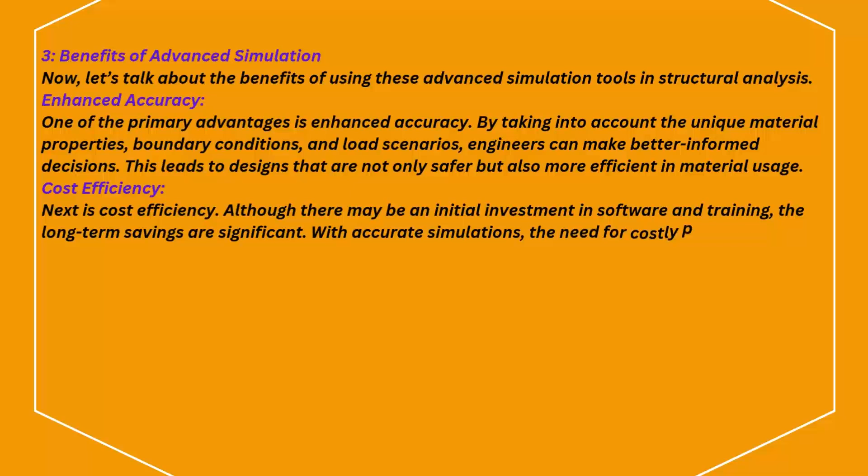Next is cost efficiency. Although there may be an initial investment in software and training, the long-term savings are significant. With accurate simulations, the need for costly physical prototypes and extensive testing is reduced. Engineers can optimize designs and identify potential issues early in the process, saving both time and money.

Improved safety. Safety is a critical concern in engineering. Advanced simulation tools enable engineers to conduct comprehensive risk assessments and safety evaluations. By simulating extreme conditions, such as earthquakes or heavy winds, engineers can better understand how structures will behave and implement necessary reinforcements or changes before construction begins.

Real-world applications. For instance, in the aerospace industry, companies use advanced simulation tools to analyze the structural integrity of aircraft components under various flight conditions. In civil engineering, simulations help design earthquake-resistant buildings in seismic zones, ensuring they can withstand potential disasters.

In conclusion, advanced simulation tools are a game-changer in structural analysis. They provide engineers with the ability to create safer, more efficient, and cost-effective designs. As technology continues to evolve, we can expect even more innovative solutions that push the boundaries of what's possible in engineering.

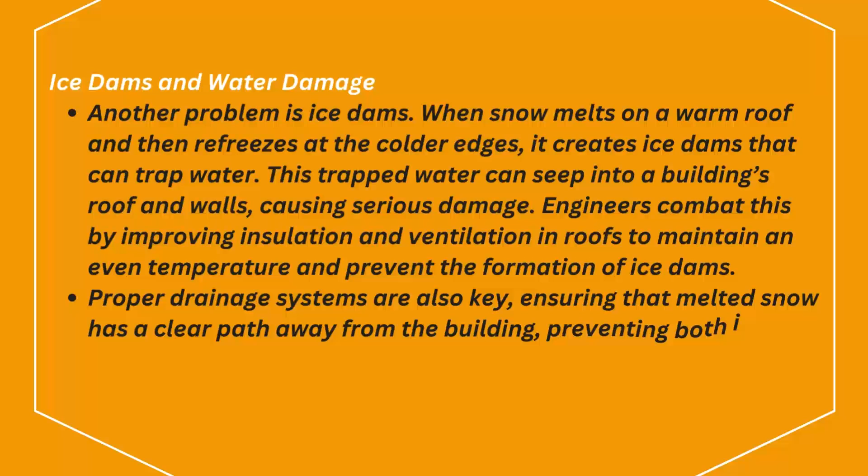Ice dams and water damage. Another problem is ice dams. When snow melts on a warm roof and then refreezes at the colder edges, it creates ice dams that can trap water. This trapped water can seep into a building's roof and walls, causing serious damage. Engineers combat this by improving insulation and ventilation in roofs to maintain an even temperature and prevent the formation of ice dams. Proper drainage systems are also key, ensuring that melted snow has a clear path away from the building, preventing both ice buildup and water infiltration.

Thermal expansion and contraction. Cold temperatures also lead to the issue of thermal expansion and contraction. Materials like steel and concrete expand in warm weather and contract in the cold. Over time, this constant movement can cause cracks and weaken structures. Engineers account for this by using flexible materials in critical areas, allowing buildings to expand and contract without causing damage.

Wind and snow drift.

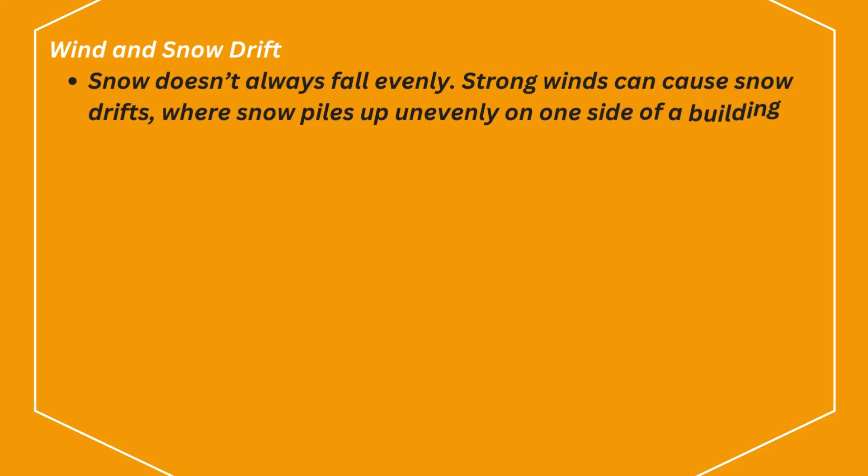Snow doesn't always fall evenly. Strong winds can cause snow drifts, where snow piles up unevenly on one side of a building. This creates unbalanced loads, which can strain the structure in unexpected ways. Engineers design buildings to handle these uneven forces by reinforcing the most vulnerable areas and incorporating wind barriers to control snow distribution. In regions where ice and snow are common, building design requires careful planning and engineering to prevent damage and ensure safety. From steep roofs to advanced drainage systems, engineers use a variety of techniques to keep buildings strong in the face of winter's challenges.

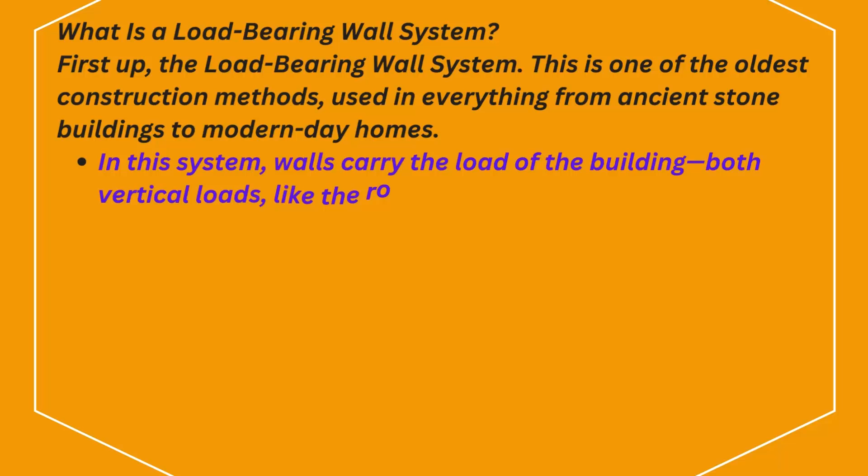What is a load-bearing wall system? First up, the load-bearing wall system. This is one of the oldest construction methods, used in everything from ancient stone buildings to modern-day homes. In this system, walls carry the load of the building, both vertical loads, like the roof, and lateral forces, like wind or earthquakes. These walls act as the primary support, and as a result, they can't be easily modified without affecting the building's stability. One important thing to remember: load-bearing walls usually limit the size of windows and openings because the walls need to remain strong to support the structure.

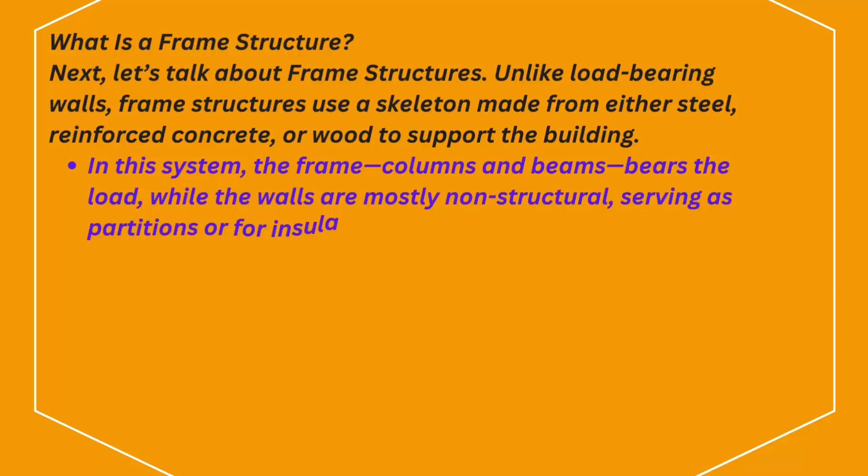What is a frame structure? Next, let's talk about frame structures. Unlike load-bearing walls, frame structures use a skeleton made from either steel, reinforced concrete, or wood to support the building. In this system, the frame, columns, and beams bear the load, while the walls are mostly non-structural, serving as partitions or for insulation. This allows for much larger windows, open spaces, and flexibility in design because the walls aren't carrying any weight. Frame structures are commonly used in high-rise buildings and modern constructions where open floor plans are important.

Let's go deeper into the load-bearing wall system. What are its strengths and weaknesses? On the plus side, load-bearing walls are often cost-effective for smaller buildings, especially homes, because they don't require as much steel or concrete. They also provide excellent thermal insulation, which can make a building more energy efficient. However, the downside is limited flexibility. Once the walls are in place, it's difficult to modify the layout without compromising the structure. And if you're looking to build taller than a few stories, this system becomes less practical due to the need for thicker, stronger walls.

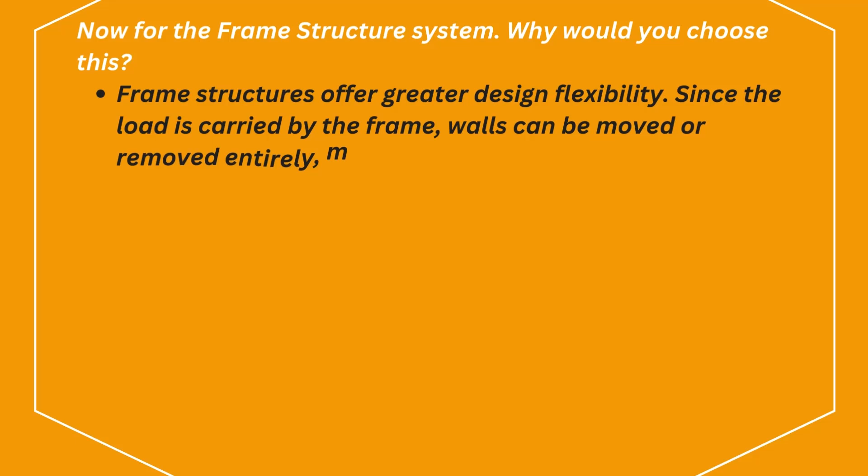Now for the frame structure system. Why would you choose this? Frame structures offer greater design flexibility. Since the load is carried by the frame, walls can be moved or removed entirely, making it perfect for open-plan spaces. This system also supports taller buildings and allows for larger windows, which is why it's popular in high-rise and commercial structures. But there are downsides too. Frame structures can be more expensive to build due to the materials required, like steel or reinforced concrete. They can also require more specialized labor and take longer to construct.

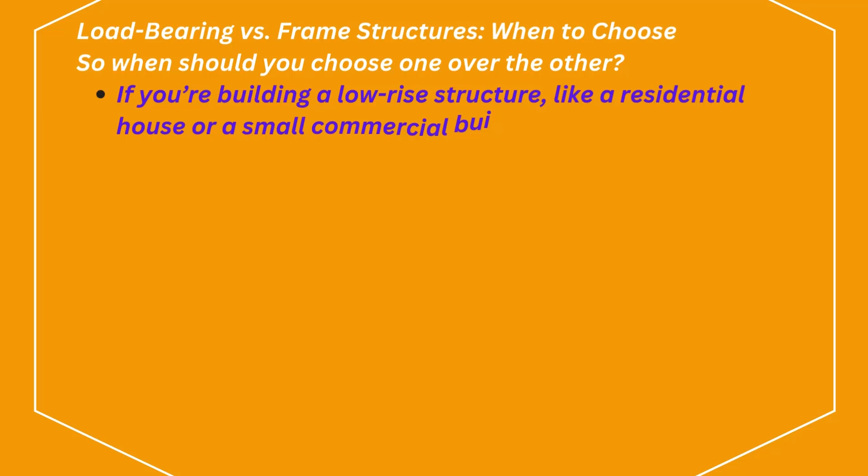Load-bearing versus frame structures. When to choose. So, when should you choose one over the other? If you're building a low-rise structure, like a residential house or a small commercial building, the load-bearing wall system could be a cost-effective and energy-efficient option. However, if you need design flexibility, large open spaces, or if you're going for a tall building, then frame structures are the way to go. In the end, it's all about your project's needs. Load-bearing wall systems offer simplicity and cost savings, while frame structures provide flexibility and support for larger, more complex designs.

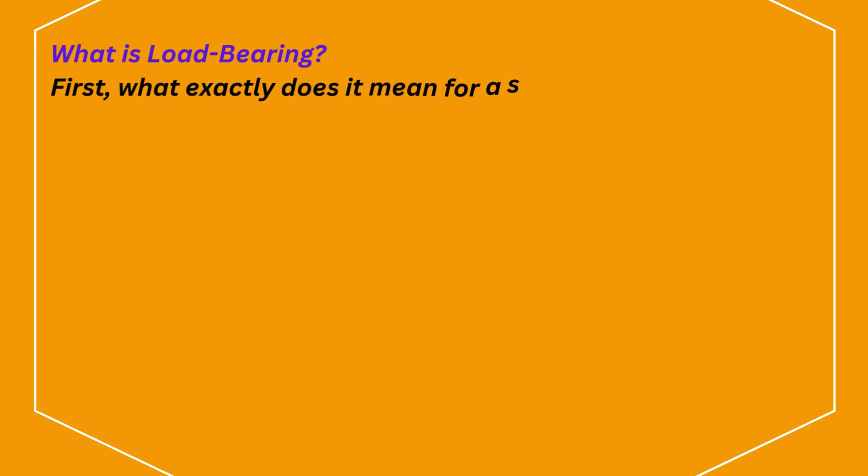What is load-bearing? First, what exactly does it mean for a structure to be load-bearing? At its most basic, it's any part of a building or a structure that supports weight, or in engineering terms, loads. This includes walls, columns, beams, and floors. These components don't just carry their own weight. They distribute external forces like gravity, wind, earthquakes, and even people walking on a floor. If a load-bearing element fails, the whole structure could be at risk.

This is why engineers spend significant time calculating how to manage these loads effectively. The key principles of load optimization: engineers optimize load-bearing structures through several fundamental principles.

First, material selection. Different materials have varying strengths. Steel, concrete, wood all have unique properties. Engineers choose materials that balance strength, cost, and durability. For example, steel is strong but expensive, while concrete is more cost-effective and excellent in compression.

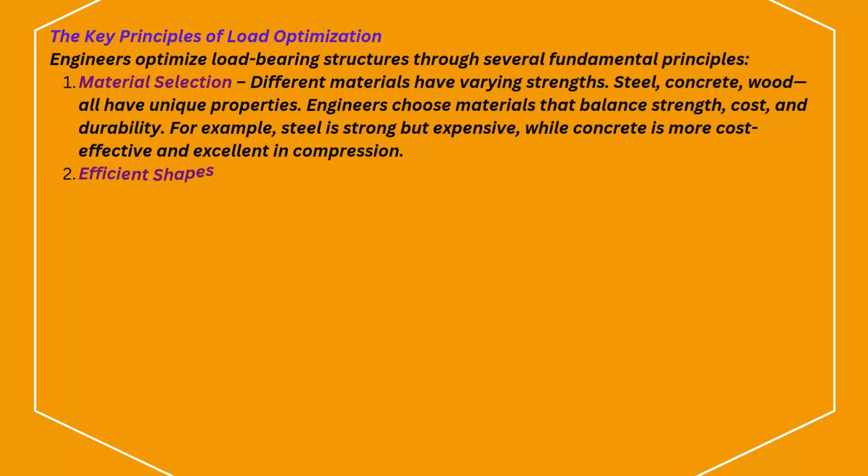Second, efficient shapes. Geometry plays a key role. Triangles and arches are often used because they distribute loads more efficiently than squares or rectangles. That's why you see triangular trusses in roofs and arched bridges. They're strong and require fewer materials.

Third, load distribution. Engineers design structures so that loads are evenly spread across multiple components. Instead of a single beam bearing all the weight, that load is shared across several beams or columns. Think of it as teamwork for materials. No single part bears the entire burden.

Fourth, redundancy. This means creating alternate load paths. If one part fails, another part can still handle the load. This prevents catastrophic collapses, making structures more resilient in emergencies.

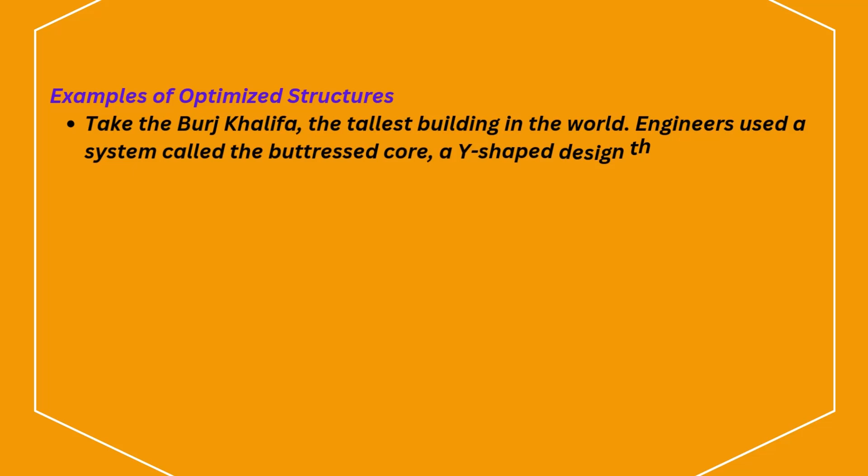Examples of optimized structures: take the Burj Khalifa, the tallest building in the world. Engineers used a system called the buttressed core, a Y-shaped design that evenly distributes the weight of the tower, reducing the load on any one point. This allows it to soar to 828 meters while still being stable.

Or consider suspension bridges like the Golden Gate Bridge. The cables distribute the bridge's load, allowing it to span incredible distances while staying light and flexible. These examples show that optimization isn't just about using strong materials, it's about using them intelligently.

In conclusion, optimizing load-bearing structures is a delicate dance between physics, materials, and design. Engineers must balance all these factors to ensure that buildings are both strong and cost-effective. The next time you walk into a skyscraper or drive over a bridge, remember, it's not just a structure, it's a carefully crafted solution designed to bear the loads of our world.

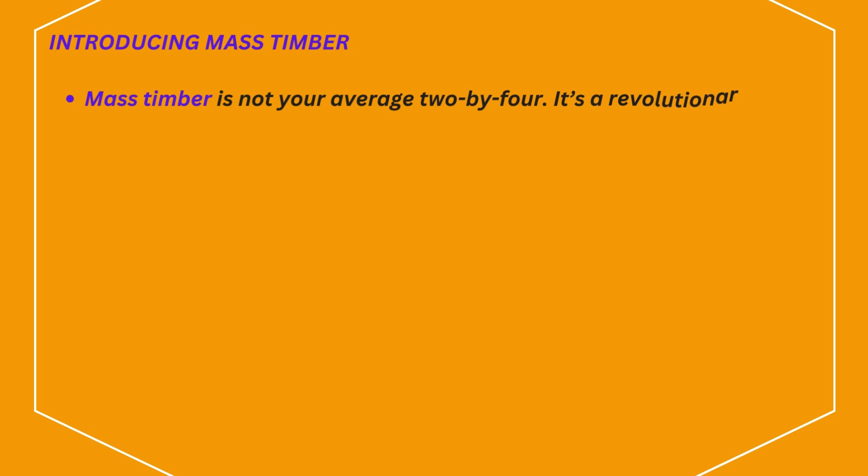The answer lies in a new type of wood material known as mass timber. Mass timber is not your average 2x4. It's a revolutionary engineered wood product that involves laminating layers of wood together to create a material that's incredibly strong, durable, and surprisingly fire-resistant. One of the most popular types is cross-laminated timber, or CLT for short. Think of it as wood on steroids. What makes mass timber special is its ability to match, and sometimes even exceed, the strength of concrete and steel. Because of its strength-to-weight ratio, it can support massive loads without crumbling under pressure.

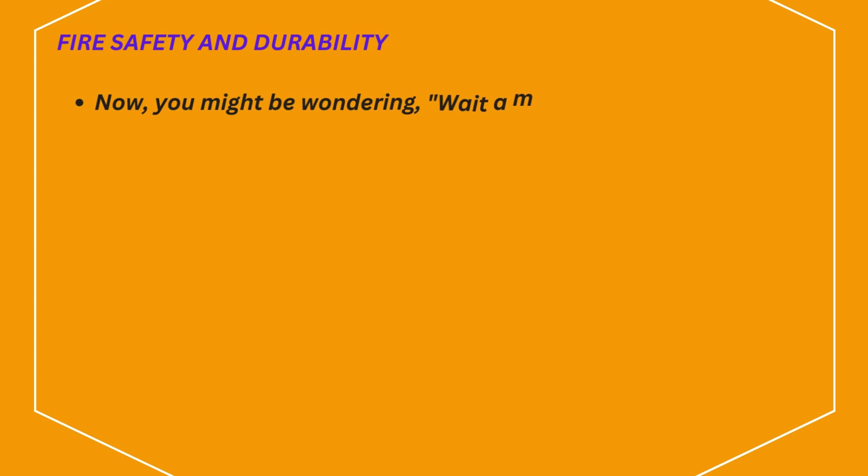Fire safety and durability: now, you might be wondering, how is wood safe in a skyscraper? Doesn't it burn easily? It's a fair question, but here's where the science gets interesting. Unlike smaller pieces of wood that catch fire quickly, mass timber chars on the outside when exposed to flames, creating a protective layer that slows down the spread of fire. In many cases, mass timber buildings have proven to be just as safe, if not safer, than traditional concrete or steel structures in fire tests. And as for durability, these wooden towers are designed to last just as long as any other modern building, with minimal maintenance required.

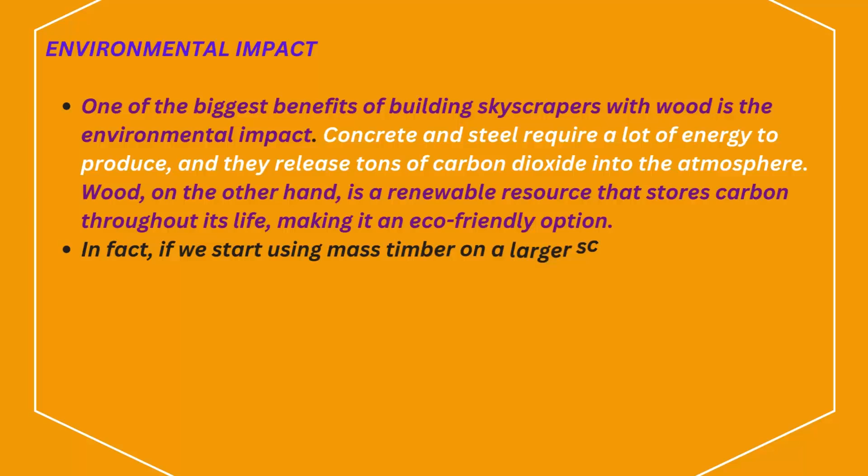Environmental impact: one of the biggest benefits of building skyscrapers with wood is the environmental impact. Concrete and steel require a lot of energy to produce, and they release tons of carbon dioxide into the atmosphere. Wood, on the other hand, is a renewable resource that stores carbon throughout its life, making it an eco-friendly option. In fact, if we start using mass timber on a larger scale, it could drastically reduce the carbon footprint of the construction industry. We're talking about a greener future, where towering cities are built from sustainable materials.

Examples of timber towers. Still skeptical? Well, let's look at some real-life examples.

In Norway, there's the Mjøstårnet, the world's tallest timber building, standing at 18 stories. And it's not alone. Projects like the HoHo Tower in Vienna and Brock Commons in Vancouver are proving that wooden skyscrapers are not only possible, but are already reshaping city skylines around the world. Architects and engineers are pushing the boundaries, and some are even designing timber buildings that could reach 30 stories or higher. The potential for wooden skyscrapers is only just beginning.

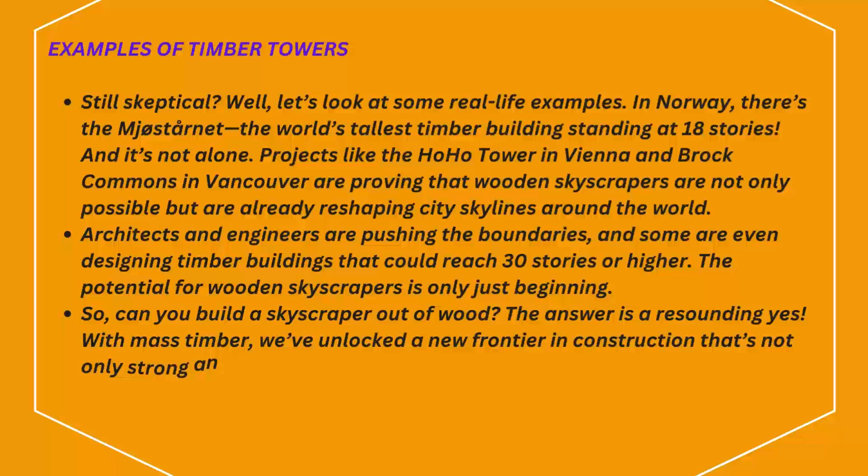So, can you build a skyscraper out of wood? The answer is a resounding yes. With mass timber, we've unlocked a new frontier in construction that's not only strong and safe, but also sustainable. As urban populations grow and environmental concerns rise, timber towers could be a key part of the future.

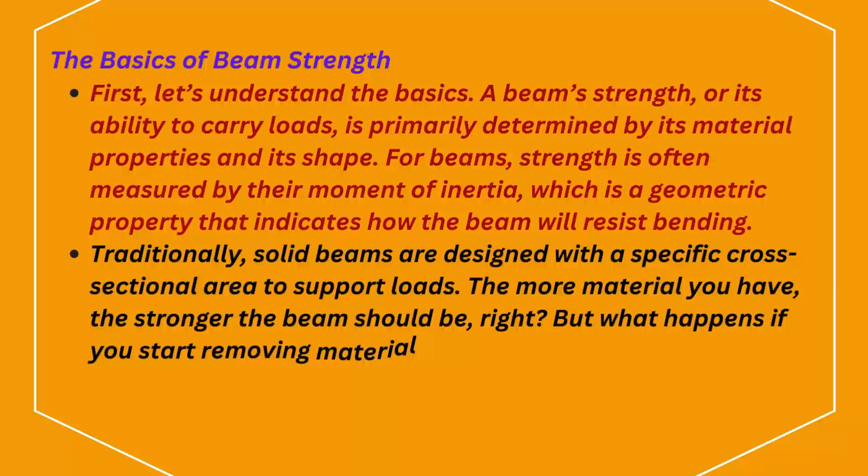The basics of beam strength. First, let's understand the basics. A beam's strength, or its ability to carry loads, is primarily determined by its material properties and its shape. For beams, strength is often measured by their moment of inertia, which is a geometric property that indicates how the beam will resist bending. Traditionally, solid beams are designed with a specific cross-sectional area to support loads. The more material you have, the stronger the beam should be, right? But what happens if you start removing material and make the beam hollow?

The science behind hollow beams. Here's where things get interesting. Hollow beams are often used in engineering and construction for a couple of reasons. First, moment of inertia: this helps determine the beam's resistance to bending, and it can actually be increased by making the beam hollow, provided you maintain the right shape. This is because distributing the material further from the center of the beam increases its resistance to bending. A hollow beam with a well-designed cross-section can have a higher moment of inertia compared to a solid beam of the same weight.

Second, material efficiency. By hollowing out a beam, you reduce the amount of material used while maintaining its strength. This not only reduces the weight of the beam, but also the overall cost of materials. The key is to optimize the hollow space and ensure that the beam's shape supports the load effectively.

Third, strength-to-weight ratio. Hollow beams can achieve a better strength-to-weight ratio than solid beams. For instance, I-beams and tubular beams are hollow, but are extremely effective in resisting bending and shear forces. They're designed to be strong and lightweight, making them ideal for applications where reducing weight is crucial.

Real-world applications and limitations. Hollow beams are widely used in various applications, such as in bridges, high-rise buildings, and even in aerospace structures. They allow for longer spans and reduce the load on supporting structures. For example, steel and concrete hollow core slabs are common in floor systems because they offer good strength with reduced weight. However, there are limitations. Designing hollow beams requires precise engineering to ensure they can handle the intended loads and stresses. If not designed correctly, hollow beams can be prone to issues like buckling or stress concentrations.

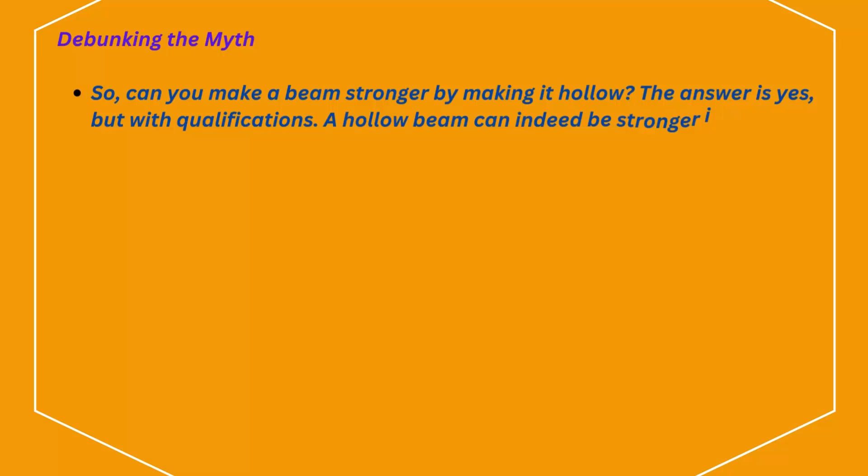Debunking the myth. So, can you make a beam stronger by making it hollow? The answer is yes, but with qualifications. A hollow beam... Hey everyone, welcome back to Blueprint to Reality.

Today, we're tackling an important topic in civil engineering: reinforced concrete versus pre-stressed concrete. Both are widely used in construction, but what sets them apart? Let's break down the key differences and help you decide which one suits your project better.

Let's start with reinforced concrete. Reinforced concrete is made by embedding steel reinforcement bars, or rebar, into concrete to increase its tensile strength. Concrete is naturally strong in compression but weak in tension, and rebar helps compensate for that by resisting the tensile forces that concrete can't handle on its own. This type of concrete is commonly used in residential buildings, bridges, and roads because it's relatively simple and cost-effective to produce. The rebar is positioned before the concrete is poured, and once it cures, the steel works together with the concrete to resist loads. However, cracking can occur if the tensile stress exceeds the concrete's capacity.

Now, let's move on to pre-stressed concrete. Pre-stressed concrete takes the concept of reinforcement a step further.

Before or during construction, steel tendons or cables are pre-tensioned or post-tensioned to put the concrete under compression. Since concrete performs best under compression, this process allows pre-stressed concrete to resist both compression and tension much more effectively than reinforced concrete.

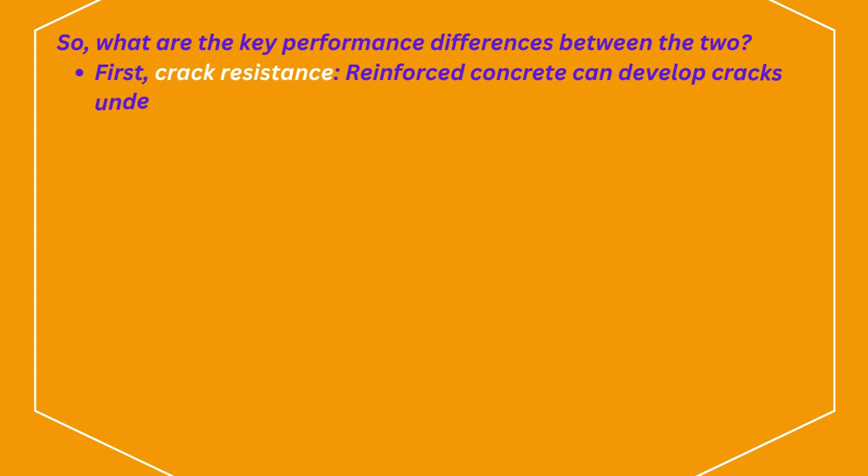So, what are the key performance differences between the two? First, crack resistance. Reinforced concrete can develop cracks under tensile loads, which can lead to structural issues over time if not properly maintained. Pre-stressed concrete, on the other hand, is designed to minimize or even eliminate cracks because of the pre-applied compression forces.

Second, load-bearing capacity. Pre-stressed concrete is much stronger and can handle heavier loads and longer spans without sagging or cracking, whereas reinforced concrete is better suited for shorter spans and moderate loads.

Finally, deflection. Pre-stressed concrete deflects less under load due to the tension steel, making it ideal for projects where minimizing deflection is critical. Now, let's talk about cost and complexity.

Reinforced concrete is simpler and cheaper to produce, making it a go-to option for smaller projects or structures where high loads and long spans aren't as important. It's easy to work with, and the construction process is straightforward.

Pre-stressed concrete, on the other hand, is more complex and requires specialized equipment and labor for tensioning the steel cables. This increases both the cost and construction time. However, the benefits of increased strength and reduced cracking make pre-stressed concrete worth the investment for larger, more demanding projects.

So there you have it. Reinforced concrete is great for simpler, smaller structures, while pre-stressed concrete excels in high-load, long-span, and crack-sensitive projects.

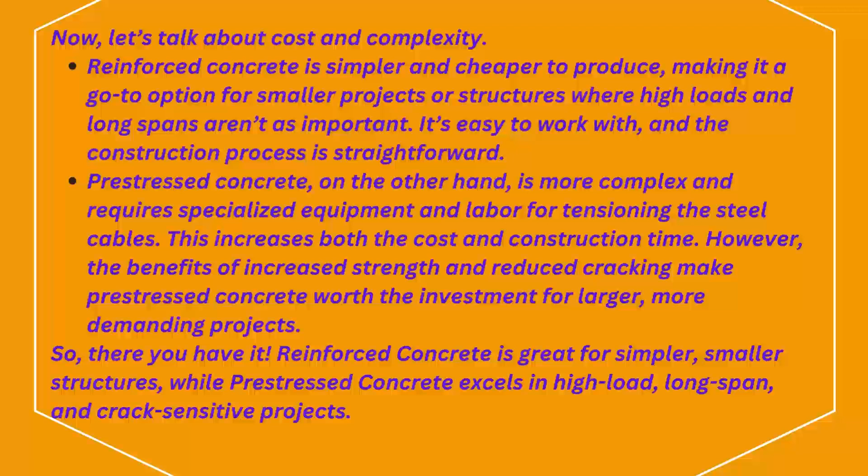In the world of engineering, bridges have always symbolized the connection between two points, overcoming physical barriers with elegance and precision. But today, engineers are pushing the boundaries even further. Modern bridge designs are redefining what's possible, blending sustainability, innovation, and structural efficiency.

1. A shift toward sustainability. Bridges are no longer just about connecting roads, they're also about connecting people to a sustainable future. Engineers are designing with eco-friendly materials and practices to reduce carbon footprints.

For example, we're seeing the rise of bridges constructed from recycled materials like plastic waste, which reduce the environmental impact. The use of modular construction, where sections are built off-site and assembled on-site, not only speeds up the process but also minimizes waste and emissions during construction.

2. Innovation in structural design. Engineers are also experimenting with new shapes and forms. Traditional bridge designs like suspension and arch bridges are still relevant, but now we're seeing incredible geometric innovations.

Think of bridges with lightweight, yet incredibly strong, materials such as carbon fiber composites. These materials allow for thinner, sleeker designs without compromising safety or durability. Some futuristic designs include self-healing concrete, a material that can repair cracks on its own, extending the lifespan of bridges

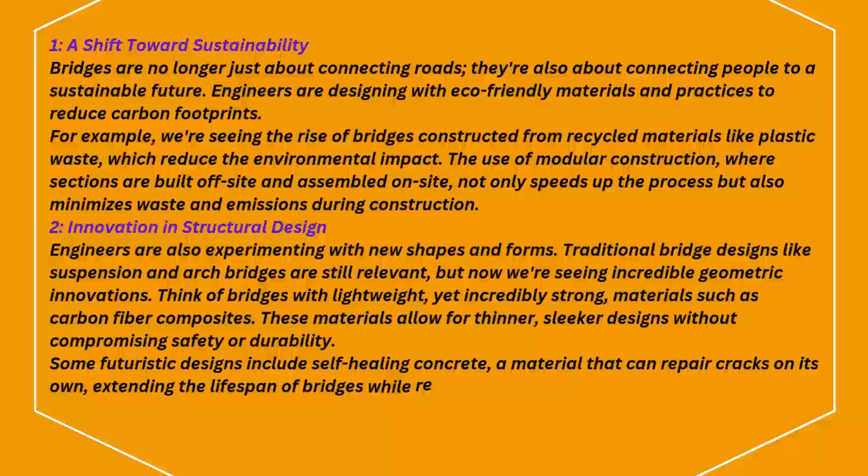while reducing the need for frequent maintenance. This not only saves money, but also increases the safety of the infrastructure.

3. Smart bridges, the future of connectivity. Perhaps the most groundbreaking development is the rise of smart bridges. Imagine a bridge that can monitor its own health in real time. Sensors embedded in the structure can detect stress, strain, temperature, and even potential weaknesses before they become critical.

This data is transmitted to engineers who can analyze it and make real-time decisions on maintenance. Smart technology also helps in predicting how a bridge will behave under certain conditions, like heavy traffic or extreme weather. These insights make it possible to ensure the safety and longevity of bridges, all while minimizing disruptions to daily life.

4. Aesthetic and functional synergy. It's not just about functionality. Modern bridge designs are fusing aesthetics with practicality. Many bridges today are works of art, designed to be both functional and beautiful.

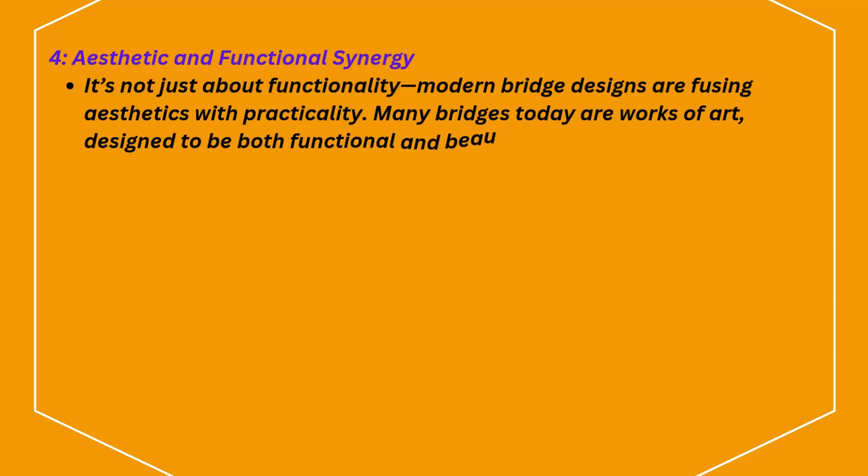Think of the Millau Viaduct in France or the Zhangjiajie Glass Bridge in China. These bridges attract tourists and blend harmoniously with their surroundings, showcasing that a bridge can be more than just infrastructure. It can be a landmark.

As the world demands more resilient, eco-friendly, and smarter infrastructure, engineers are responding with creative solutions that challenge traditional boundaries. From sustainable materials to smart technology, the bridges of tomorrow are being built today. They don't just connect us physically, they represent the future of engineering innovation.

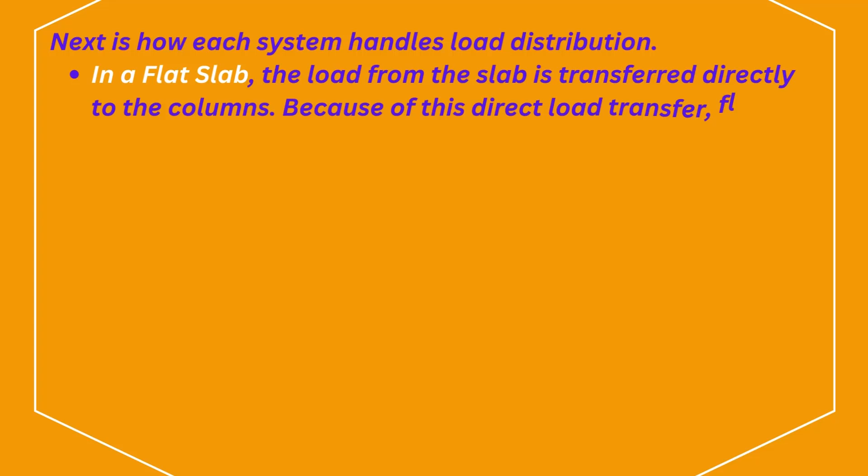Next is how each system handles load distribution. In a flat slab, the load from the slab is transferred directly to the columns. Because of this direct load transfer, flat slabs need to be thicker or require the addition of column capitals to prevent punching shear failures, especially in areas with high loads. This can lead to increased material usage.

In a two-way slab system, the load is transferred across beams in both directions, which distributes the load more evenly. This leads to a more efficient design for handling heavier loads, especially in multi-story buildings or structures with a grid-like layout. Now, let's talk about design flexibility and space utilization.

One of the main advantages of the flat slab is the freedom it offers for open spaces. Without beams, you have more design flexibility for architectural layouts, especially for offices, malls, or parking garages. You can create large, open rooms without the visual or spatial interruption of beams. In contrast, two-way slabs require beams, which can limit interior space design. Beams create drops in ceiling height and may affect the positioning of utilities, lighting, and partitions.

However, the added strength of this system can allow for thinner slabs and a potentially lighter structure overall, which is beneficial in smaller-scale projects or residential buildings.

The cost and construction time are always important considerations. Flat slabs are generally quicker to construct because of their simpler formwork. The absence of beams means fewer steps during construction, which can reduce labor costs and save time. But remember, the thicker slabs and additional reinforcement may increase the cost of materials.

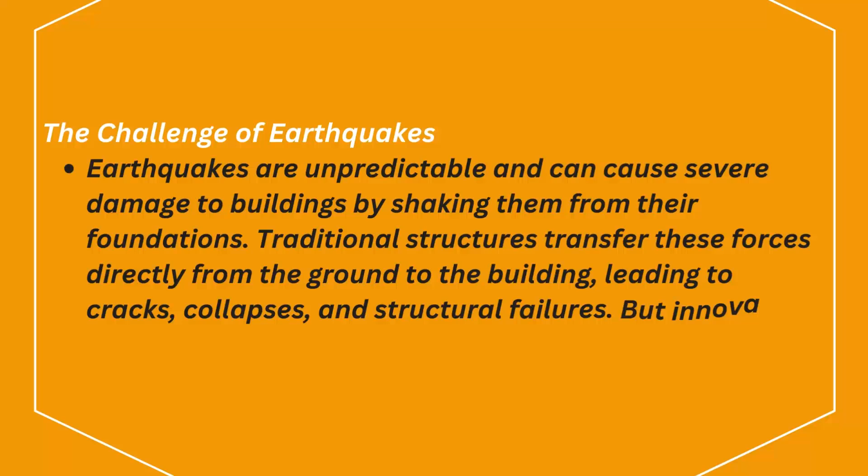Earthquakes are unpredictable and can cause severe damage to buildings by shaking them from their foundations. Traditional structures transfer these forces directly from the ground to the building, leading to cracks, collapses, and structural failures. But innovations like base isolators and tuned mass dampers are revolutionizing how we build to withstand seismic events.

Base isolators. Let's start with base isolators. These devices are installed between a building's foundation and its structure, acting as a buffer during an earthquake. Instead of letting the building move with the ground, base isolators allow the foundation to shift independently from the rest of the structure. This reduces the amount of force transferred to the building, dramatically lowering the risk of damage.

Base isolators typically consist of layers of rubber and steel with a flexible core. When seismic waves hit, the isolators absorb and spread out the energy, allowing the building above to sway gently without absorbing the full impact.

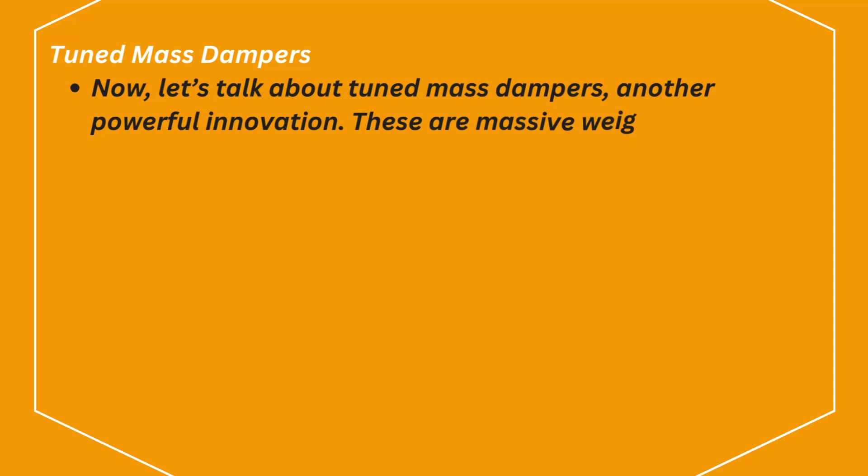Tuned mass dampers. Now let's talk about tuned mass dampers, another powerful innovation. These are massive weights, usually installed at the top of a building, that move in opposition to seismic vibrations. When an earthquake shakes the building, the damper swings in the opposite direction, effectively canceling out much of the motion.

Tuned mass dampers are carefully calibrated, or tuned, to match the building's natural frequency. This tuning allows them to absorb and dissipate the energy from seismic vibrations, preventing the building from swaying too much and reducing structural stress. How they work together: base isolators and tuned mass dampers create a powerful defense against earthquakes.

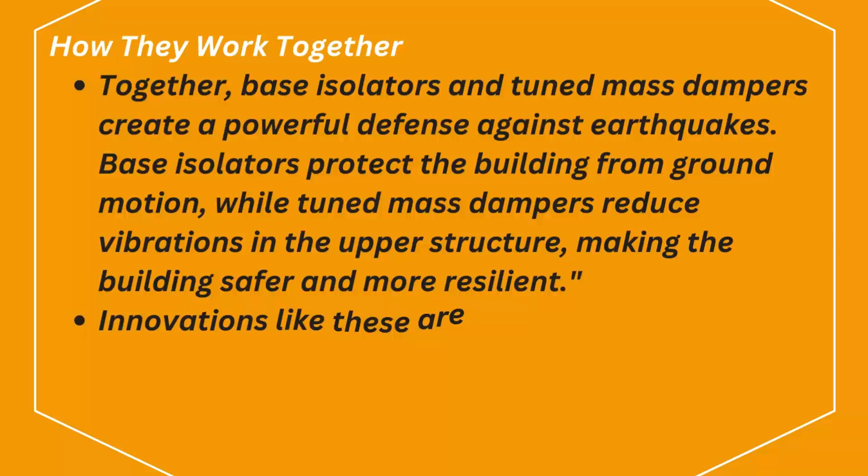Base isolators protect the building from ground motion, while tuned mass dampers reduce vibrations in the upper structure, making the building safer and more resilient. Innovations like these are changing the way we design buildings in earthquake-prone areas, saving lives and protecting property.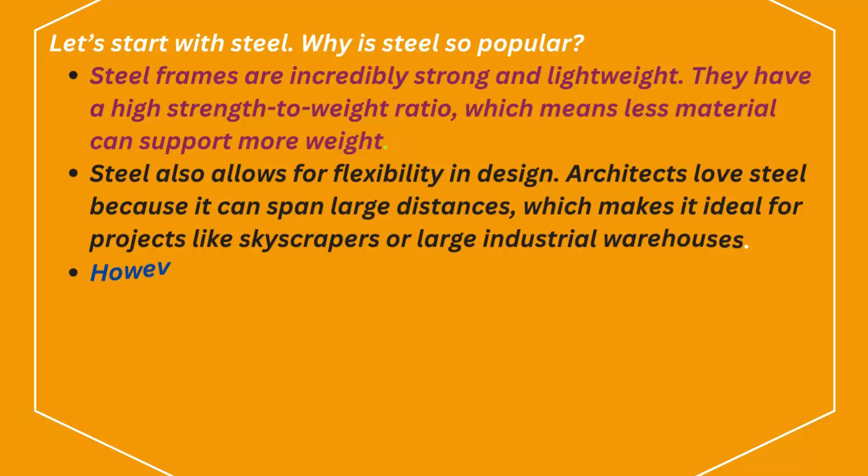Let's start with steel. Why is steel so popular? Steel frames are incredibly strong and lightweight. They have a high strength-to-weight ratio, which means less material can support more weight. Steel also allows for flexibility in design. Architects love steel because it can span large distances, which makes it ideal for projects like skyscrapers or large industrial warehouses. However, steel has some drawbacks.

It's susceptible to corrosion, especially in harsh weather conditions. This means maintenance costs can add up over time. Steel loses strength in high temperatures, so in case of fire, special fireproofing treatments are needed.

Now, let's talk about concrete frames. Why choose concrete? Concrete is extremely durable and handles compression well, making it a solid choice for low to mid-rise buildings. Concrete has excellent fire resistance, and it's great for projects where fire safety is a priority. However, concrete frames are much heavier than steel.

That means the foundation has to support more weight, which can increase construction time and cost. Another issue with concrete is its low tensile strength, which is why it needs reinforcement with steel rebar to prevent cracking. Finally, let's talk about cost and construction speed.

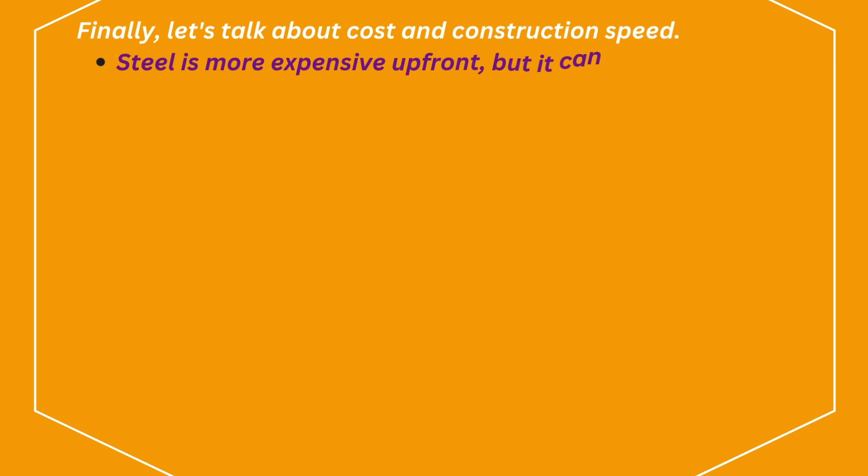Steel is more expensive upfront, but it can reduce labor costs due to faster assembly. Concrete, while generally cheaper in raw material, takes longer to build due to curing times. However, labor costs are often higher than steel. So if you're looking for a quick build, steel is often the better choice. But if you're focusing on long-term durability and fire resistance, concrete might be your go-to.

So, which is better? It depends on your project's needs. Steel offers speed and flexibility, while concrete gives you durability and fire safety.

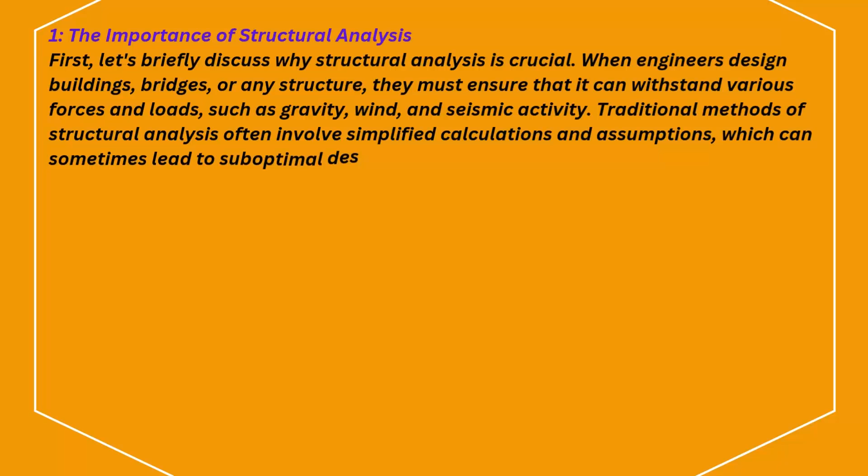The importance of structural analysis. First, let's briefly discuss why structural analysis is crucial. When engineers design buildings, bridges, or any structure, they must ensure that it can withstand various forces and loads, such as gravity, wind, and seismic activity. Traditional methods of structural analysis often involve simplified calculations and assumptions, which can sometimes lead to suboptimal designs or, worse, structural failures. This is where advanced simulation tools come into play.

What are advanced simulation tools? These tools include software programs that use finite element analysis, computational fluid dynamics, and other numerical methods to create detailed models of structures. By simulating real-world conditions, these tools allow engineers to visualize how a structure will respond to different forces throughout its life cycle. For example, finite element analysis software breaks down a structure into smaller, manageable elements, calculating how each one behaves under various conditions. This level of detail provides insights that traditional methods simply cannot offer.

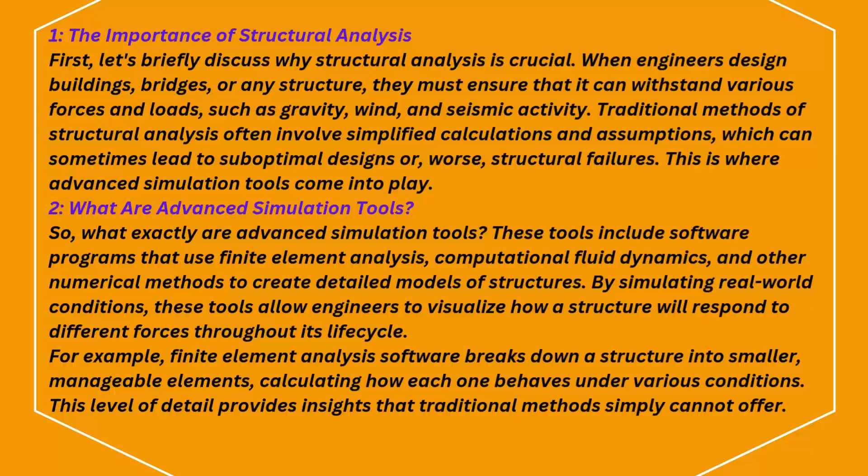Benefits of advanced simulation. Now, let's talk about the benefits of using these advanced simulation tools in structural analysis. Enhanced accuracy: one of the primary advantages is enhanced accuracy. By taking into account the unique material properties, boundary conditions, and load scenarios, engineers can make better informed decisions. This leads to designs that are not only safer, but also more efficient in material usage.

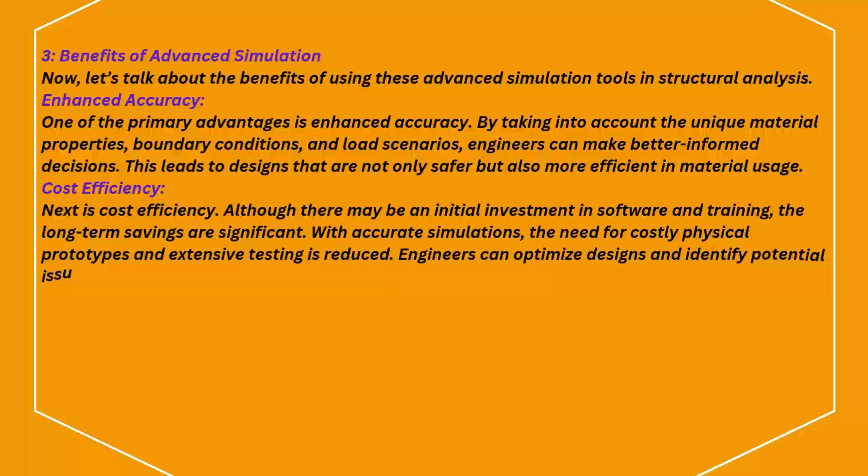Cost efficiency: next is cost efficiency. Although there may be an initial investment in software and training, the long-term savings are significant. With accurate simulations, the need for costly physical prototypes and extensive testing is reduced. Engineers can optimize designs and identify potential issues early in the process, saving both time and money.

Improved safety. Safety is a critical concern in engineering. Advanced simulation tools enable engineers to conduct comprehensive risk assessments and safety evaluations. By simulating extreme conditions, such as earthquakes or heavy winds, engineers can better understand how structures will behave and implement necessary reinforcements or changes before construction begins.

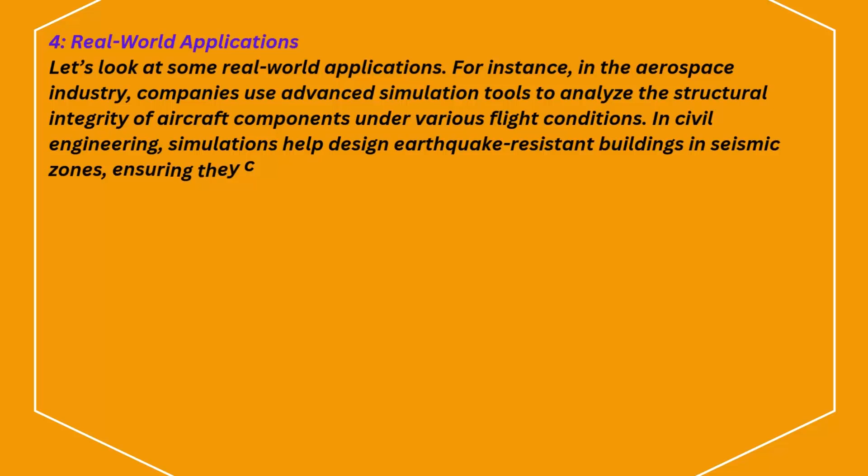Real-world applications. Let's look at some examples. In the aerospace industry, companies use advanced simulation tools to analyze the structural integrity of aircraft components under various flight conditions. In civil engineering, simulations help design earthquake-resistant buildings in seismic zones, ensuring they can withstand potential disasters.

In conclusion, advanced simulation tools are a game-changer in structural analysis. They provide engineers with the ability to create safer, more efficient, and cost-effective designs. As technology continues to evolve, we can expect even more innovative solutions that push the boundaries of what's possible in engineering. Thank you for joining us today.

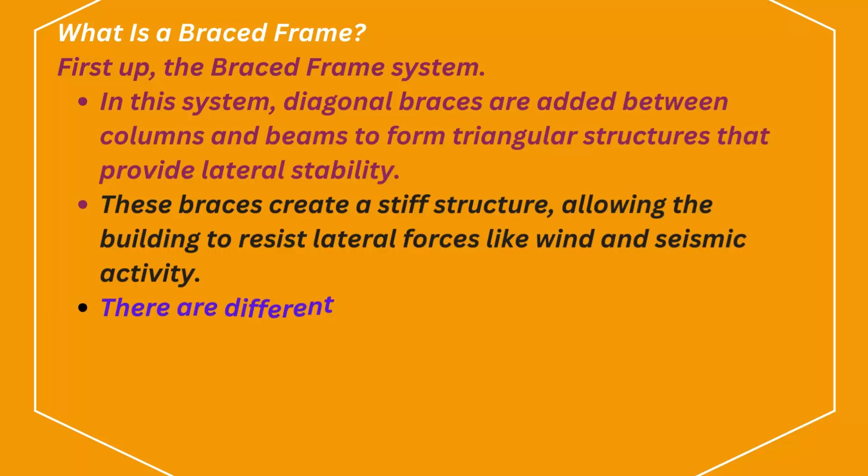What is a braced frame? First up, the braced frame system. In this system, diagonal braces are added between columns and beams to form triangular structures that provide lateral stability. These braces create a stiff structure, allowing the building to resist lateral forces like wind and seismic activity. There are different types of braced frames, such as X-bracing and K-bracing, each designed for different needs, but they all work by converting lateral forces into tension and compression within the braces.

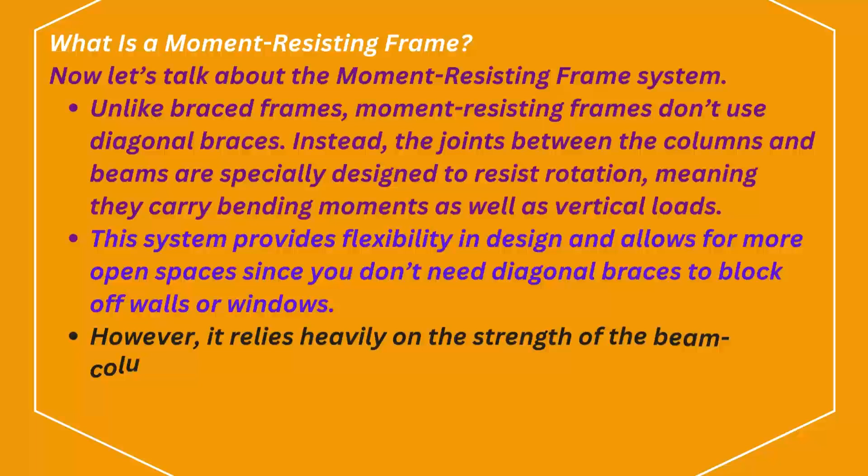What is a moment-resisting frame? Unlike braced frames, moment-resisting frames don't use diagonal braces. Instead, the joints between the columns and beams are specially designed to resist rotation, meaning they carry bending moments as well as vertical loads. This system provides flexibility in design and allows for more open spaces, since you don't need diagonal braces to block off walls or windows. However, it relies heavily on the strength of the beam-column connections to resist lateral forces.

So, what makes braced frames a good choice? The biggest advantage is their high stiffness. Braced frames are excellent at resisting lateral forces, making them a common choice in areas prone to earthquakes and high winds. They're also typically more cost-effective because braces are easier and faster to install than reinforced beam-column joints. However, one downside is that braced frames can restrict architectural design, as the diagonal braces often limit where windows, doors, or open spaces can be placed.

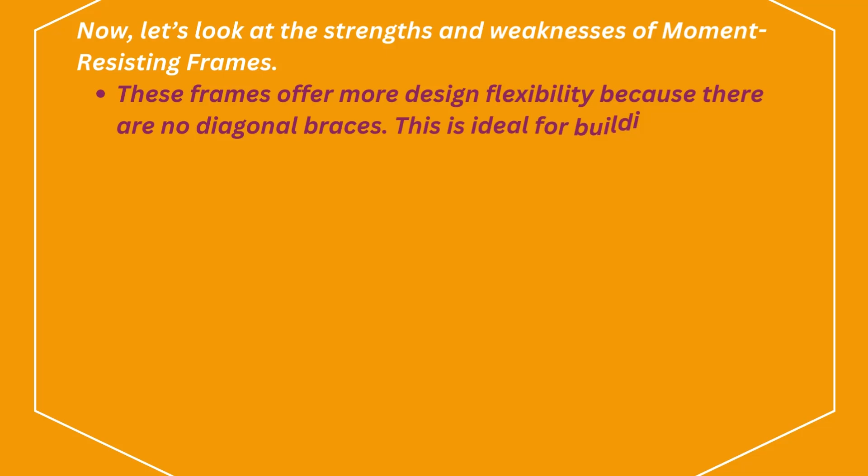Now, let's look at the strengths and weaknesses of moment-resisting frames. These frames offer more design flexibility because there are no diagonal braces, which is ideal for buildings that require large, open spaces or where aesthetics are a priority. They also allow for more natural light because you can have larger windows or open facades. However, the construction of these systems is more complex and expensive, since the joints between beams and columns need to be carefully designed and reinforced to handle both vertical and lateral loads.

Braced versus moment-resisting frames: when to choose. So how do you decide which system to use? If you're working on a building where lateral stability is the top concern, like in earthquake-prone regions, a braced frame is often the better choice due to its stiffness and cost-effectiveness. But if your project requires flexible design and large open spaces, like in modern office buildings or high-rises, a moment-resisting frame may be worth the extra investment.

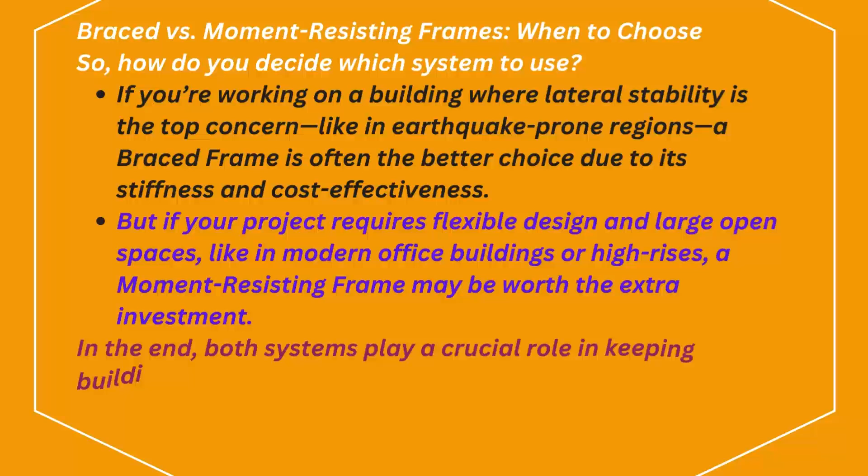In the end, both systems play a crucial role in keeping buildings safe and stable. Your choice depends on the balance between design flexibility and lateral strength.

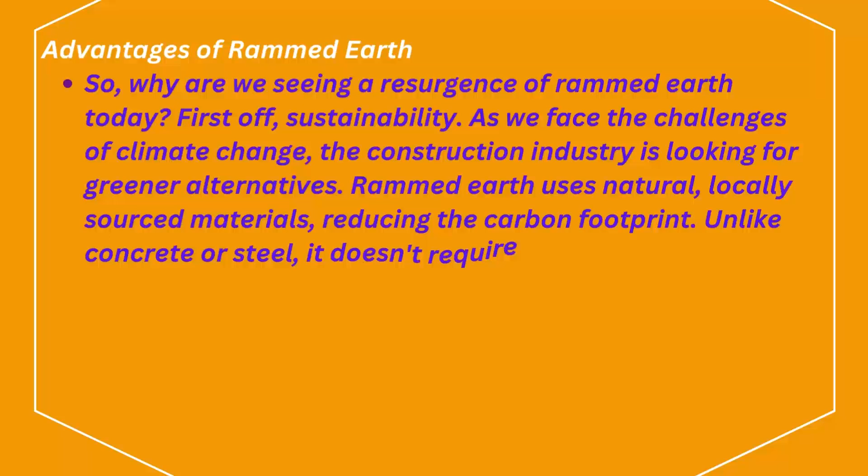Advantages of rammed earth. So why are we seeing a resurgence of rammed earth today? First, sustainability. As we face the challenges of climate change, the construction industry is looking for greener alternatives. Rammed earth uses natural, locally sourced materials, reducing the carbon footprint. Unlike concrete or steel, it doesn't require high-energy production processes. Secondly, its thermal properties are a major benefit.

Rammed earth walls provide excellent insulation, helping to regulate indoor temperatures naturally. This means reduced energy consumption for heating and cooling.

Modern applications and innovations. In recent years, architects and engineers have started to reimagine how rammed earth can fit into modern design. From luxury homes to eco-friendly resorts, rammed earth structures are finding their place in contemporary architecture. Advanced construction techniques and new materials, like stabilizers, are improving the strength and durability of these buildings while maintaining their natural aesthetic. Designers are also experimenting with various pigments and textures, creating visually striking structures that blend seamlessly with their surroundings.

Rammed earth is a perfect blend of ancient wisdom and modern innovation, offering a sustainable, durable, and beautiful building solution. As we move forward in the age of eco-conscious design, this technique may play a key role in reshaping how we think about construction.

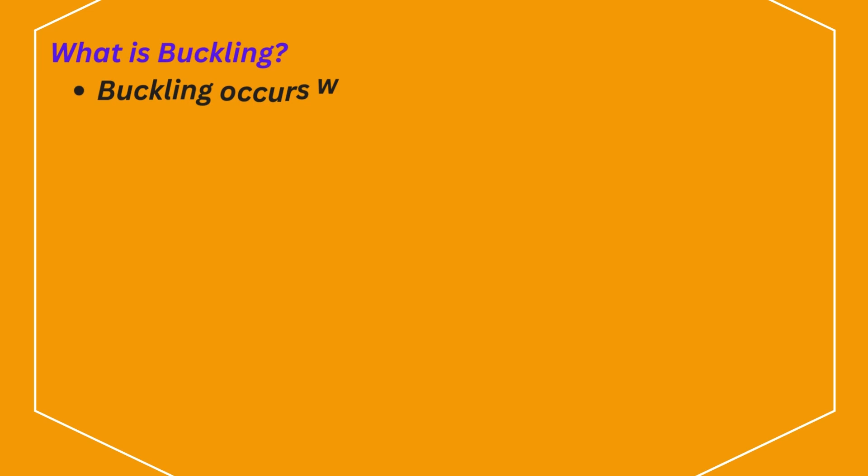Welcome to this brief but important explanation of a critical phenomenon in structural engineering: buckling. You've probably heard of structures collapsing unexpectedly, and in many cases, buckling is the hidden culprit. So, what exactly is buckling? Why does it happen, and how do engineers prevent it? Over the next few minutes, we'll explore these questions to uncover the dangers of buckling and its role in structural failures.

What is buckling? Buckling occurs when a structural element, like a column or beam, suddenly bends or twists under compressive stress. Imagine holding a long, thin ruler upright and pressing down gently from the top. At first, it resists the force, but at some point, it bends to the side. This is buckling. In real structures, this can be extremely dangerous. Columns in buildings or bridges are especially vulnerable to buckling when they are subjected to too much weight or force.

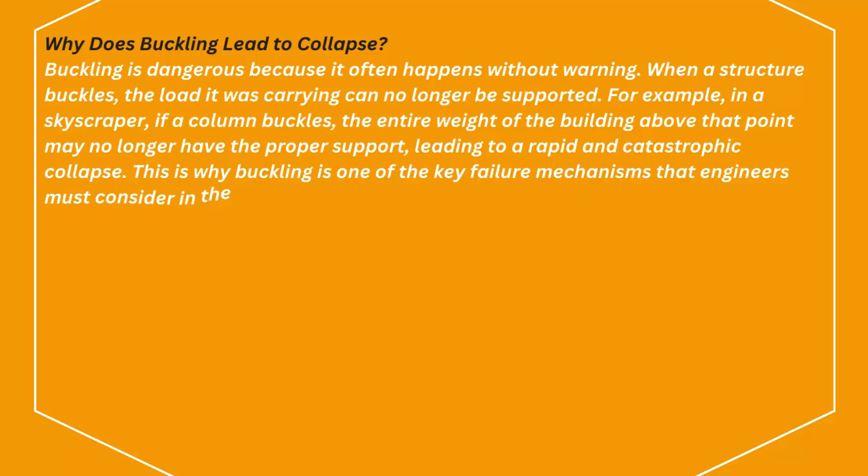Why does buckling lead to collapse? Buckling is dangerous because it often happens without warning. When a structure buckles, the load it was carrying can no longer be supported. For example, in a skyscraper, if a column buckles, the entire weight of the building above that point may no longer have the proper support, leading to a rapid and catastrophic collapse. This is why buckling is one of the key failure mechanisms that engineers must consider in their designs, especially for tall buildings and slender structures.

Critical load, the tipping point. So, what determines whether or not a structure will buckle? Engineers calculate something called the critical load, which is the maximum load a column or beam can handle before buckling. This depends on several factors, like the material, the length and shape of the element, and how it's supported at both ends. Once the load goes beyond this critical point, even a tiny increase in force can cause sudden failure. That's why understanding critical load is essential for designing structures that can withstand compressive forces.

Preventing buckling in structural design. To prevent buckling, engineers reinforce structures by adding bracing, using stronger materials, or making columns thicker to resist compressive forces. Sometimes, reducing the length of the columns or providing better support at the base can also minimize the risk. By understanding the causes and effects of buckling, engineers can create safer structures that won't fail under unexpected loads.

Conclusion. In summary, buckling is a silent but severe threat in structural engineering. When a structure buckles under compressive stress, it loses its ability to support loads, leading to potential collapse. By carefully calculating the critical load and designing to prevent buckling, engineers ensure that buildings, bridges, and other structures remain safe and stable, even under heavy loads.

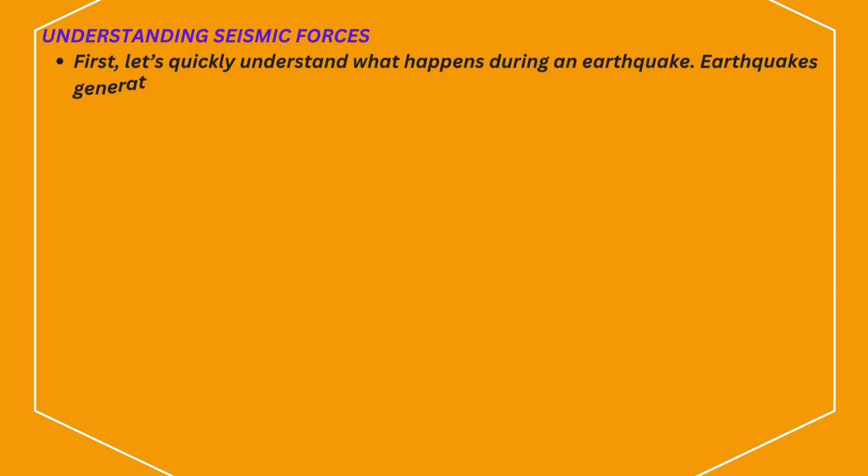Understanding seismic forces. First, let's quickly understand what happens during an earthquake. Earthquakes generate lateral forces, side-to-side movements that can shake a structure violently. Bridges are particularly vulnerable because they span long distances and need to support heavy loads, like vehicles and trains. During an earthquake, the ground beneath a bridge can move unpredictably, creating forces that can cause columns to crack, joints to fail, or even lead to complete collapse if not designed properly.

Flexibility through base isolation. One of the most effective techniques engineers use to protect bridges is base isolation. This involves placing flexible bearings or isolators between the bridge structure and its foundation. These isolators act like shock absorbers, allowing the bridge to move independently of the ground during an earthquake. By isolating the movement, the bridge can sway with the seismic waves without absorbing the full force of the ground shaking, greatly reducing the risk of damage.

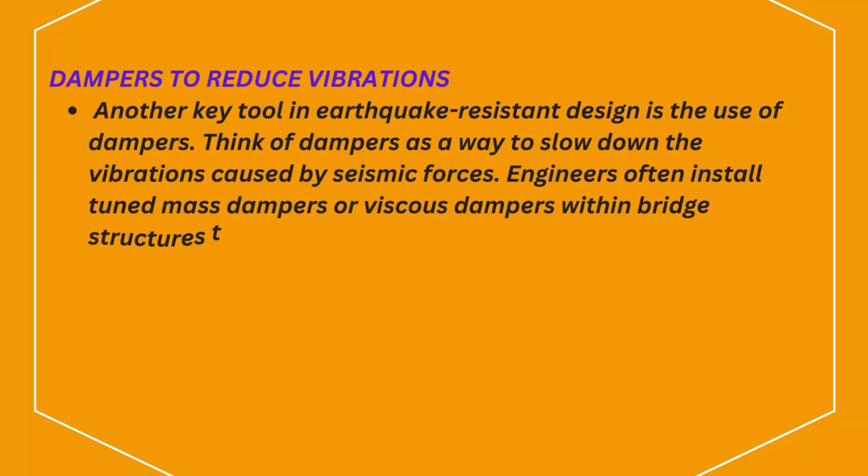Dampers to reduce vibrations. Another key tool in earthquake-resistant design is the use of dampers. Think of dampers as a way to slow down the vibrations caused by seismic forces. Engineers often install tuned mass dampers or viscous dampers within bridge structures to absorb and dissipate energy. These devices can reduce the amplitude of vibrations, minimizing the impact on the bridge's key components like its deck and supports. Dampers essentially help calm the shaking, protecting the bridge from excessive stress.

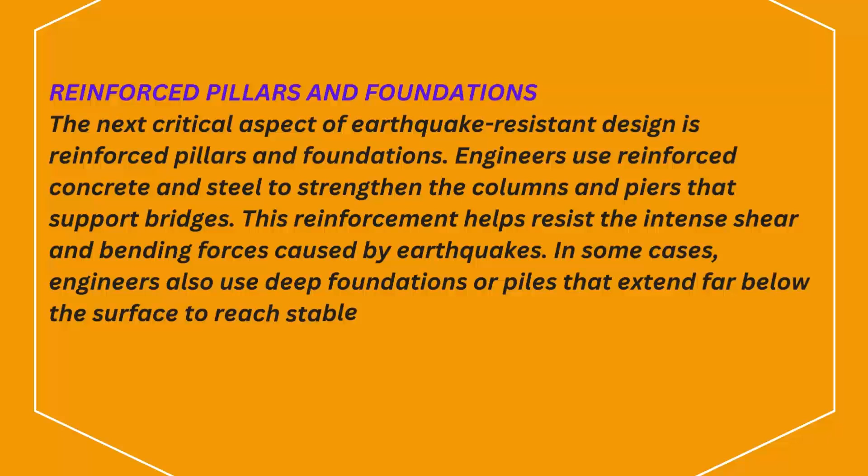Reinforced pillars and foundations. The next critical aspect of earthquake-resistant design is reinforced pillars and foundations. Engineers use reinforced concrete and steel to strengthen the columns and piers that support bridges. This reinforcement helps resist the intense shear and bending forces caused by earthquakes. In some cases, engineers also use deep foundations or piles that extend far below the surface to reach stable soil or bedrock, ensuring the bridge remains stable even when the ground above it shakes.

Expansion joints. Lastly, bridges are equipped with expansion joints. These are gaps or flexible connections that allow different parts of the bridge to move independently during seismic activity. By providing space for controlled movement, expansion joints prevent parts of the bridge from colliding with each other or cracking under stress. They help ensure the bridge can flex without breaking.

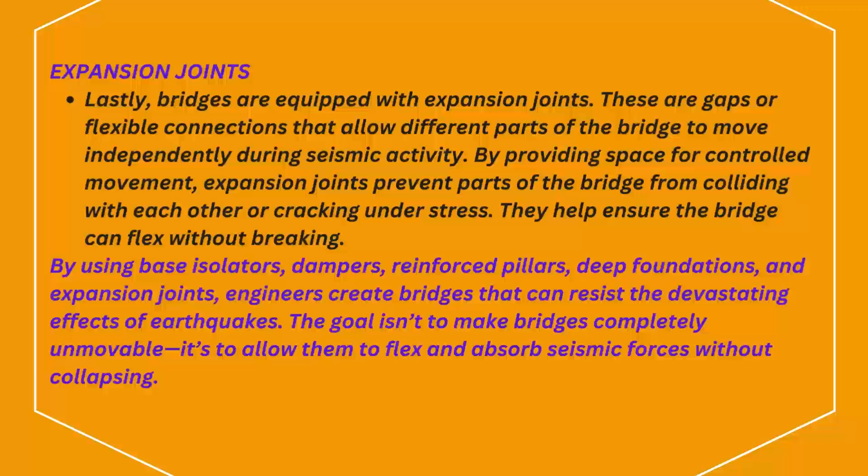By using base isolators, dampers, reinforced pillars, deep foundations, and expansion joints, engineers create bridges that can resist the devastating effects of earthquakes. The goal isn't to make bridges completely unmovable, it's to allow them to flex and absorb seismic forces without collapsing.

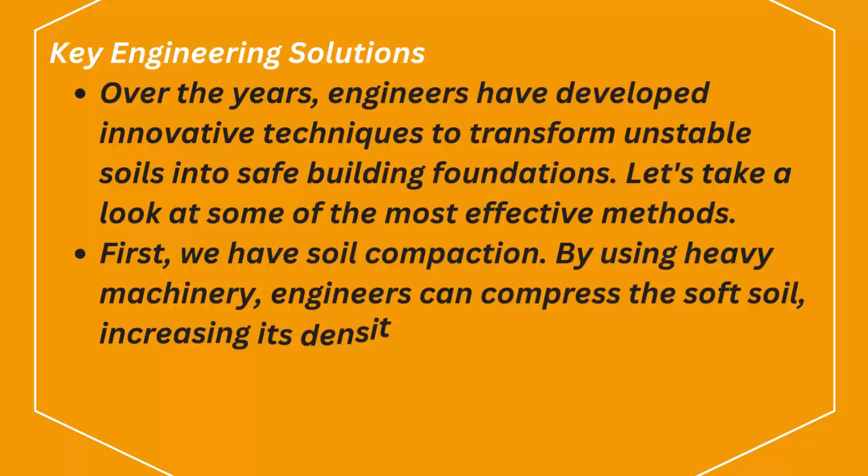Key engineering solutions. Over the years, engineers have developed innovative techniques to transform unstable soils into safe building foundations. Let's take a look at some of the most effective methods. First, we have soil compaction. By using heavy machinery, engineers can compress the soft soil, increasing its density and strength. This process minimizes the soil's ability to shift or settle under the weight of a structure.

Next, there's soil stabilization, which involves mixing soft soils with stabilizing agents like lime, cement, or even chemicals. These additives react with the soil to improve its strength and reduce its moisture content, making it more suitable for construction. Another technique is deep foundations, where instead of relying on surface soil, engineers drive piles, long columns made of concrete, steel, or wood, deep into the ground until they reach stable soil or bedrock. This allows the structure to transfer its load to a more secure layer, bypassing the soft soil entirely.

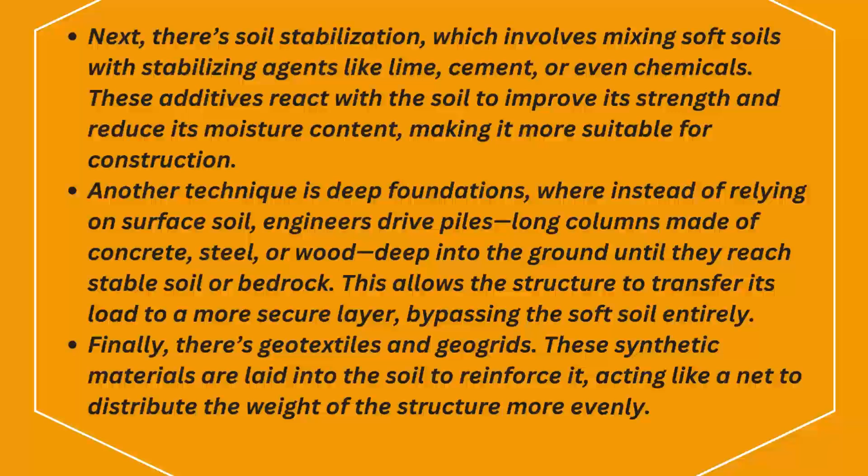Finally, there's geotextiles and geogrids. These synthetic materials are laid into the soil to reinforce it, acting like a net to distribute the weight of the structure more evenly.

Case study. One famous example of building on soft soil is the construction of the Millennium Tower in San Francisco. Initially built on deep foundations that didn't fully reach bedrock, the tower began to sink and tilt due to the soft soil underneath. Engineers are now using advanced techniques like underpinning and soil stabilization to fix the problem, demonstrating the importance of understanding soil behavior when designing large structures.

Building on soft soils is no easy task, but with innovative engineering solutions, we've turned unstable ground into solid foundations for some of the world's most iconic structures. From deep foundations to soil stabilization, civil engineering continues to push the boundaries of what's possible.

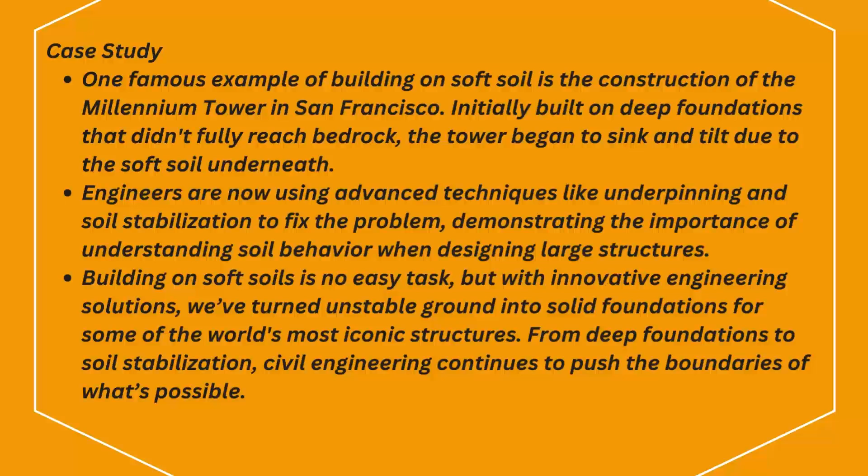In today's video, we're diving into a topic that's more relevant than ever: how to design buildings that can withstand extreme heat conditions. As climate change intensifies, many regions are experiencing record-breaking temperatures. This poses a serious challenge for buildings, especially in areas prone to heat waves. But don't worry, we have some smart structural solutions that can help make buildings more resilient to rising temperatures.

Thermal mass: the power of heat absorption. The first solution to consider is thermal mass. But what exactly is it? Thermal mass refers to a material's ability to absorb and store heat. In buildings designed for hot climates, materials like concrete, brick, or stone can be used to regulate indoor temperatures. By absorbing heat during the day and releasing it slowly at night, thermal mass can reduce temperature fluctuations. This helps keep interiors cooler during the hottest parts of the day without relying heavily on air conditioning, which saves energy and reduces the building's carbon footprint.

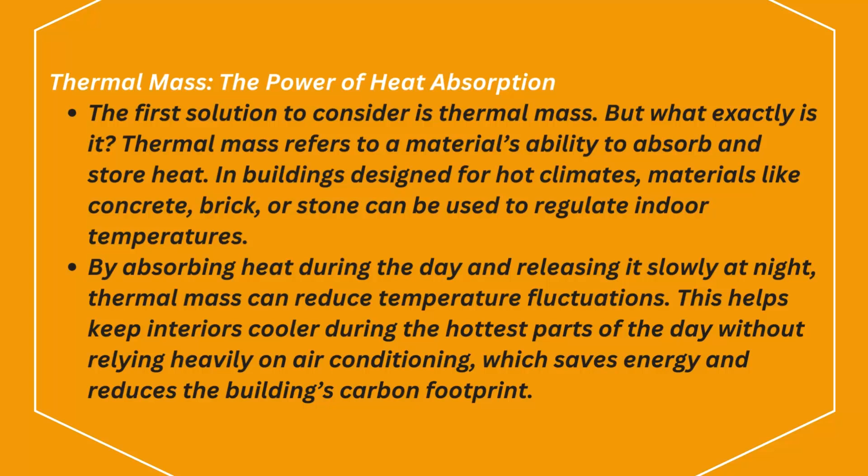Shading strategies: passive cooling. Next up, let's talk about shading. Strategic shading is a low-cost, passive cooling technique that can make a world of difference in extreme heat. Roof overhangs, awnings, and exterior shading devices like louvers and pergolas can block direct sunlight from hitting the building's windows and walls. By keeping the sun's rays off the building, shading reduces the amount of heat entering the structure. It's simple, yet highly effective. Combining shading with reflective or light-colored materials further minimizes heat absorption, keeping the structure cool from the outside in.

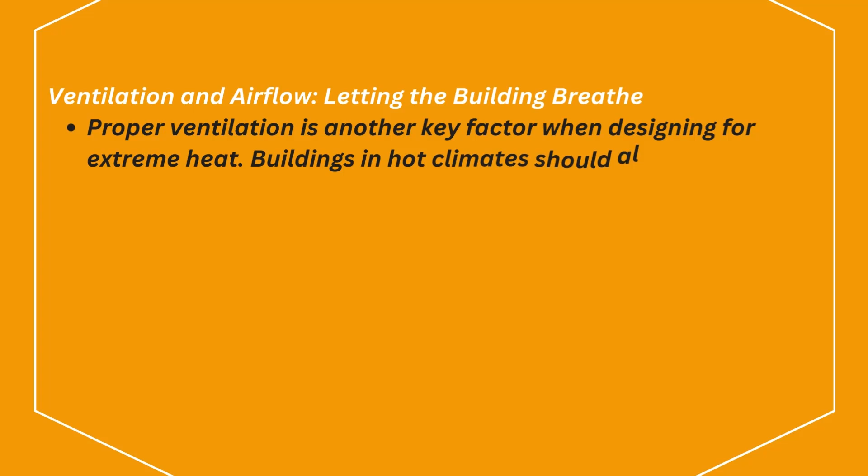Ventilation and airflow: letting the building breathe. Proper ventilation is another key factor when designing for extreme heat. Buildings in hot climates should allow for natural airflow to circulate cool air through the space and expel hot air. Architects often use techniques like cross-ventilation, where windows on opposite walls are aligned to allow fresh air to flow through. Stack ventilation, which uses height differences to encourage hot air to rise and escape, can also be used to keep interiors cool.

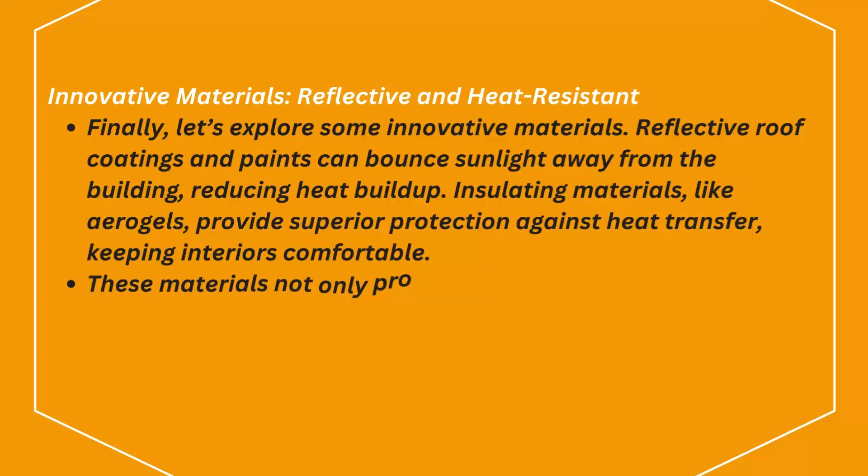Innovative materials: reflective and heat-resistant. Finally, let's explore some innovative materials. Reflective roof coatings and paints can bounce sunlight away from the building, reducing heat buildup. Insulating materials like aerogels provide superior protection against heat transfer, keeping interiors comfortable. These materials not only protect against extreme heat, but also improve the building's energy efficiency, making them a smart choice for future-proofing structures.

Thanks for watching. These are just a few structural solutions that can help buildings withstand extreme heat.

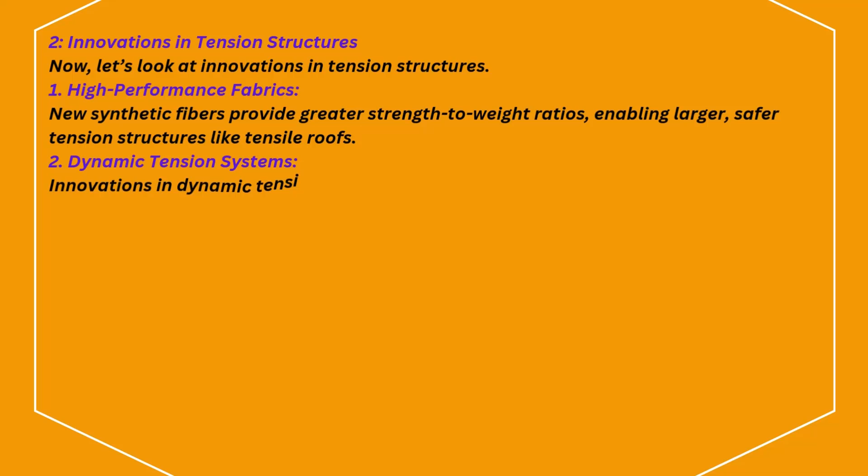Innovations in tension structures. Now, let's look at innovations in tension structures. First, high-performance fabrics: new synthetic fibers provide greater strength-to-weight ratios, enabling larger, safer tension structures like tensile roofs. Second, dynamic tension systems: innovations in dynamic tension systems allow for automatic adjustments based on environmental changes, improving stability in varying conditions.

Innovations in compression structures. Next, we have compression structures. First, advanced concrete technologies: ultra-high-performance concrete, UHPC, offers exceptional compressive strength, allowing for slimmer, more ambitious designs. Second, 3D printing: 3D printing technology enables the creation of complex compression structures that optimize material use and allow for rapid on-site construction.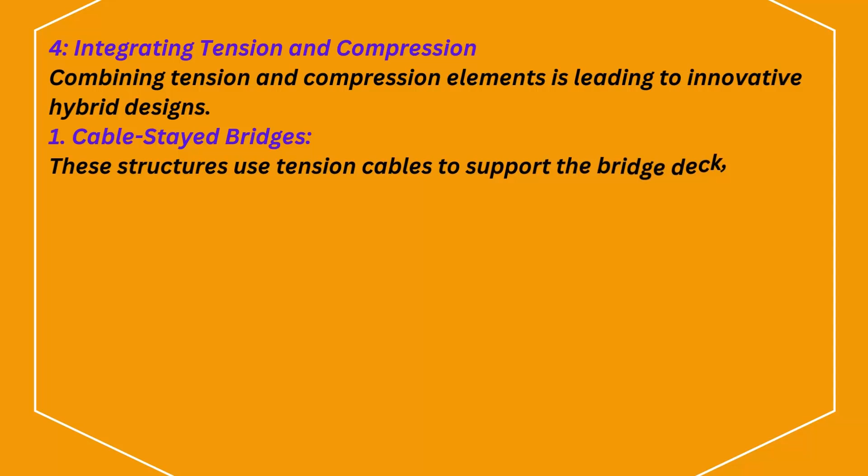Integrating tension and compression. Combining tension and compression elements is leading to innovative hybrid designs. Cable-stayed bridges use tension cables to support the bridge deck, while compression towers provide stability, resulting in lightweight, aesthetically pleasing designs. In conclusion, innovations in tension and compression structures are transforming design and construction.

From advanced materials to 3D printing, these advancements enhance the efficiency and safety of our built environment.

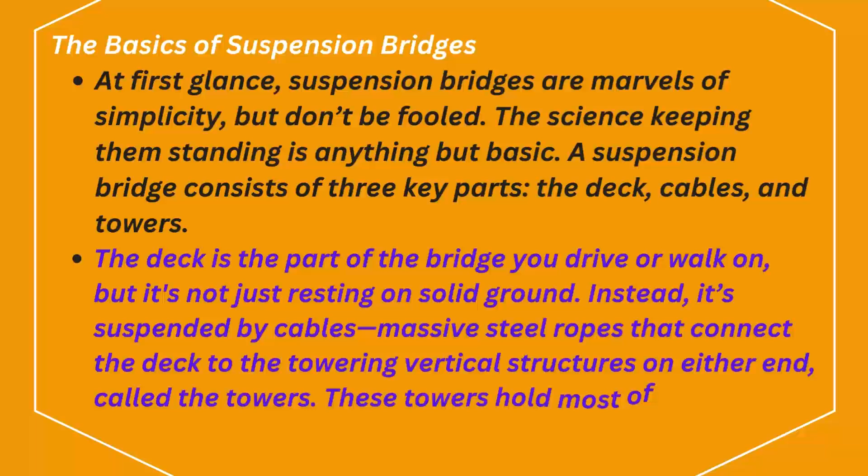The deck is the part of the bridge you drive or walk on, but it's not just resting on solid ground. Instead, it's suspended by cables, massive steel ropes that connect the deck to the towering vertical structures on either end, called the towers. These towers hold most of the weight.

How suspension works. Now, here's where the physics comes in. Those steel cables are the backbone of the suspension system. When a load like cars, trucks, or even people moves across the bridge, it creates downward force on the deck. The cables take that force and spread it across the entire span of the bridge. They transfer the load to the towers, which then transfer it down into the ground, or foundations, deep beneath the surface. Think of the bridge as a giant hammock.

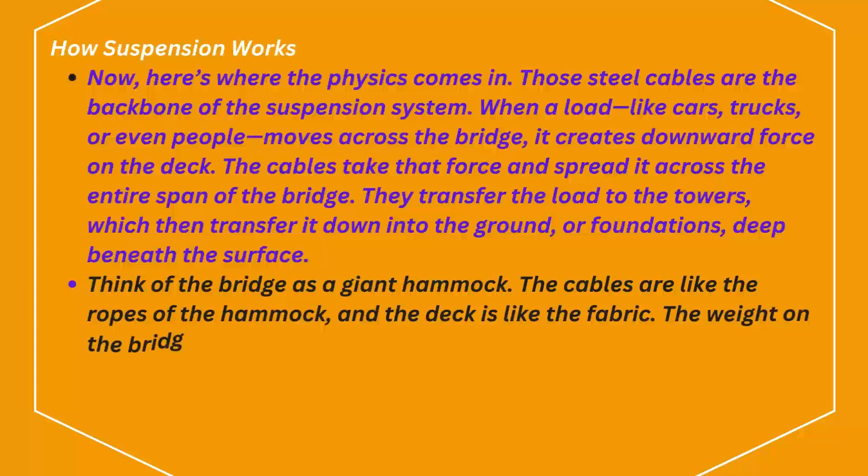The cables are like the ropes of the hammock, and the deck is like the fabric. The weight on the bridge causes tension in the cables, but the towers act as anchors, keeping everything in balance.

Stability and flexibility. An important feature of suspension bridges is that they're designed to be both strong and flexible. In fact, flexibility is crucial. Winds, temperature changes, and even earthquakes can cause the bridge to move slightly. That movement helps it absorb stress instead of breaking. Engineers calculate how much sway a bridge can handle to ensure it stays standing, even in harsh conditions.

The cables are made from thousands of smaller steel wires twisted together, allowing them to carry incredible weight and remain flexible enough to handle shifting forces.

So the next time you drive over a suspension bridge, take a moment to appreciate the science at work. It's not just concrete and steel, it's an intricate dance of tension, weight distribution, and flexibility. That's the magic that keeps these bridges standing tall and strong.

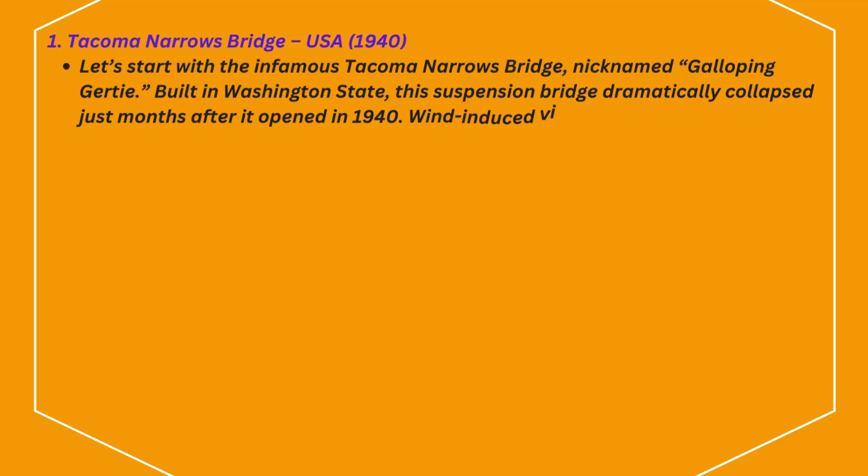1. Tacoma Narrows Bridge, USA, 1940. Let's start with the infamous Tacoma Narrows Bridge, nicknamed Galloping Gertie. Built in Washington state, this suspension bridge dramatically collapsed just months after it opened in 1940. Wind-induced vibrations caused the bridge to sway uncontrollably, as captured in now-famous footage. The design overlooked the effects of wind on such a flexible structure. This disaster revolutionized how engineers approach aerodynamics in bridge design, highlighting the importance of accounting for natural forces.

2. Hyatt Regency Walkway Collapse, USA, 1981. Next is the Hyatt Regency Walkway collapse in Kansas City, Missouri, in 1981. During a hotel event, two suspended walkways gave way, falling onto a crowded lobby below. This collapse killed 114 people and remains one of the deadliest structural failures in U.S. history. The cause? A change in the original design for the walkway's support rods, which couldn't bear the load. This disaster emphasized the dangers of modifying structural designs without thorough re-evaluation.

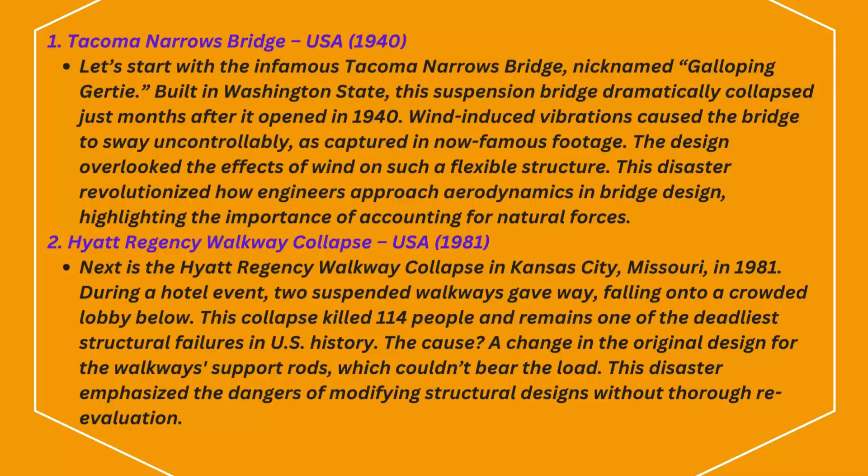3. Ronan Point Tower, UK, 1968. The collapse of Ronan Point, a residential tower in London, occurred just two months after it was completed. In 1968, a gas explosion on the 18th floor caused one corner of the building to collapse like a stack of dominoes. The failure exposed the fragility of precast concrete panel construction and poor connections between structural components. This disaster led to stricter regulations on high-rise buildings in the UK and better safety standards for gas installations.

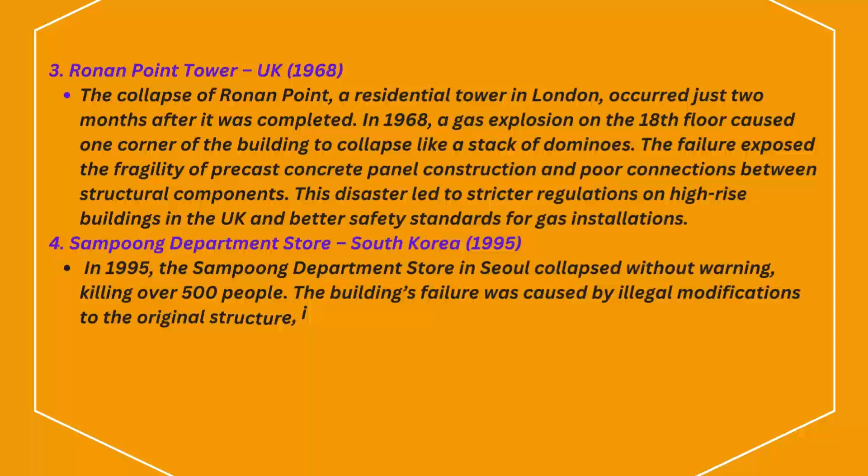4. Sampoong Department Store, South Korea, 1995. In 1995, the department store in Seoul collapsed without warning, killing over 500 people. The building's failure was caused by illegal modifications to the original structure, including the removal of support columns and overloading of the rooftop. The disaster was a wake-up call about the dangers of ignoring engineering principles in favor of profit, stressing the importance of strict adherence to structural integrity.

5. Florida International University Bridge Collapse, USA, 2018. In 2018, the pedestrian bridge at Florida International University collapsed just days after its main span was installed, killing 6 people. The collapse occurred due to design flaws in the bridge's tensioning system, which created cracks that went unaddressed.

This tragic failure underscored the importance of early detection of structural problems and following protocols during construction.

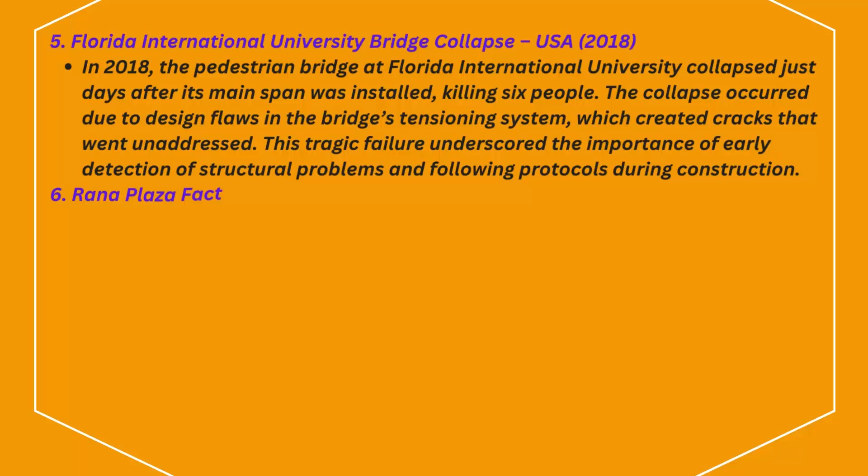6. Rana Plaza Factory Collapse, Bangladesh, 2013. The Rana Plaza factory collapse in Bangladesh is one of the deadliest structural failures in history, killing over 1,100 workers in 2013. The building, which housed multiple garment factories, was poorly constructed with substandard materials and unauthorized floors. The collapse revealed the extreme dangers of cutting costs at the expense of safety and led to worldwide scrutiny of building regulations in developing countries.

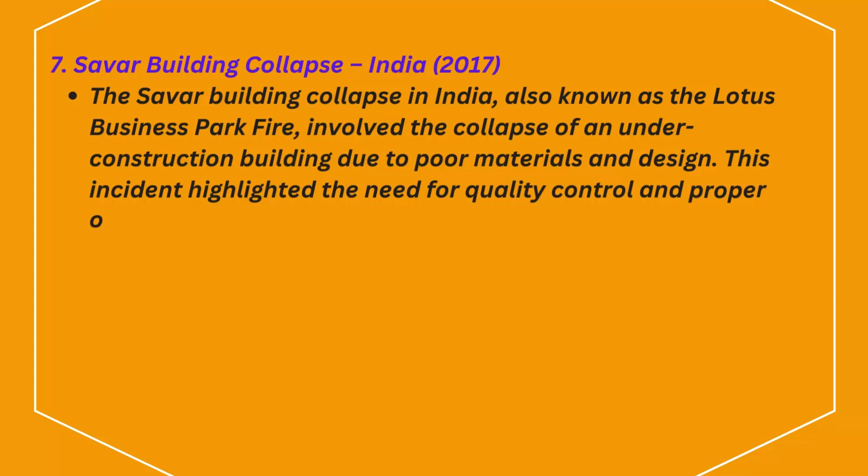7. Savar Building Collapse, India, 2017. The Savar building collapse in India, also known as the Lotus Business Park fire, involved the collapse of an under-construction building due to poor materials and design. This incident highlighted the need for quality control and proper oversight, particularly in fast-growing urban areas where construction standards may be compromised.

Each of these disasters demonstrates what can happen when engineering goes wrong, whether through design flaws, cost-cutting, or poor execution. But they've also paved the way for better practices, stricter regulations, and new technologies.

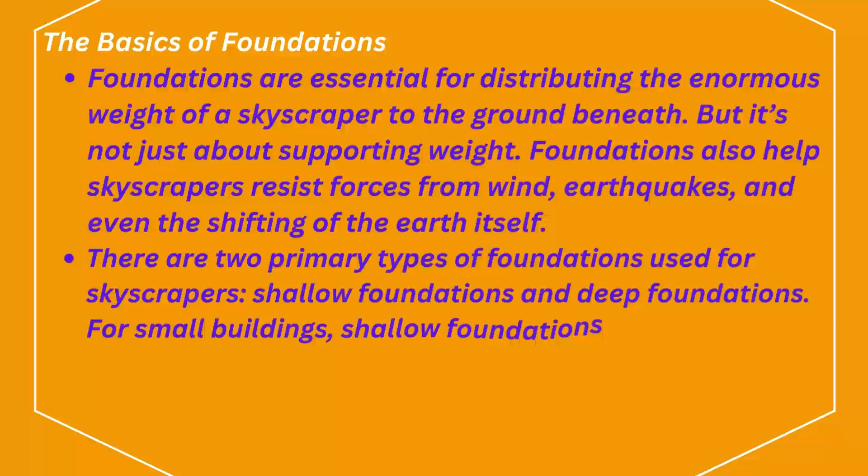Let's break it down. The basics of foundations. Foundations are essential for distributing the enormous weight of a skyscraper to the ground beneath. But it's not just about supporting weight. Foundations also help skyscrapers resist forces from wind, earthquakes, and even the shifting of the earth itself. There are 2 primary types of foundations used for skyscrapers: shallow foundations and deep foundations. For small buildings, shallow foundations are usually enough. But skyscrapers? They need something much more robust.

Deep foundations explained. Skyscrapers rely on deep foundations, which go far below the surface to find solid ground or bedrock. The most common types are piles and caissons. Let's start with piles. Piles are long, slender columns made of concrete, steel, or even wood that are driven deep into the earth. These piles either reach bedrock or are driven into dense layers of soil that can support the building's weight. The goal? To transfer the load from the skyscraper down to a stronger, more stable layer of earth.

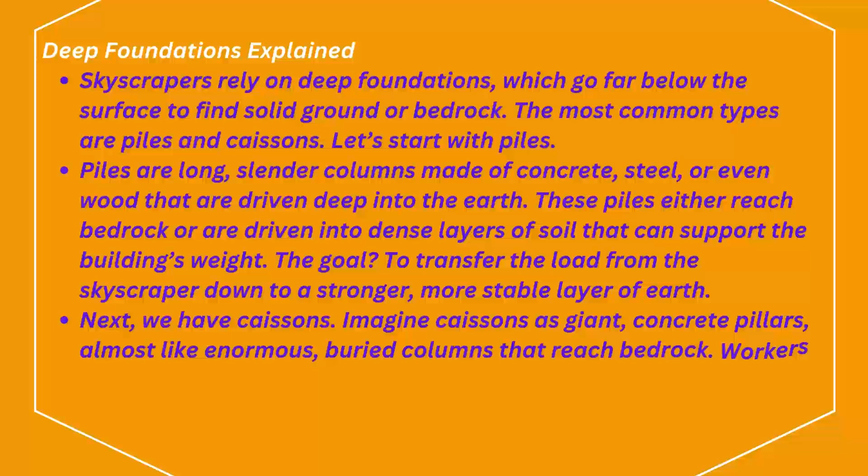Next, we have caissons. Imagine caissons as giant, concrete pillars, almost like enormous, buried columns that reach bedrock. Workers excavate deep shafts, fill them with concrete, and voila, you've got a super strong foundation.

Challenges of building foundations. But it's not always easy. In cities like New York and Chicago, where skyscrapers are everywhere, engineers have to deal with unpredictable soil, water tables, and nearby structures. Sometimes, they use a technique called friction piles, where the friction between the soil and the sides of the piles helps support the weight of the building.

Another key challenge is settlement. Settlement happens when the soil under the foundation compacts over time. If one side settles more than the other, the building could tilt or crack. Engineers have to design foundations to minimize this uneven settlement.

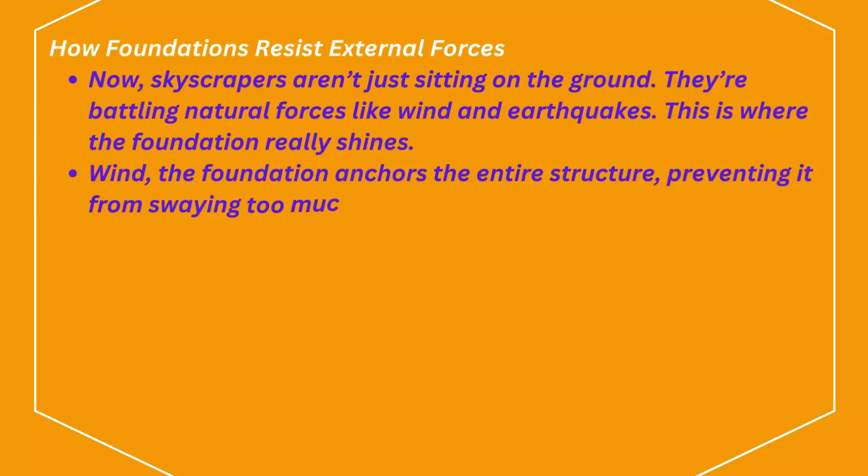How foundations resist external forces. Now, skyscrapers aren't just sitting on the ground. They're battling natural forces like wind and earthquakes. This is where the foundation really shines. Wind: the foundation anchors the entire structure, preventing it from swaying too much. Engineers even build in flexibility, allowing the skyscraper to move slightly without causing damage. In earthquake-prone areas, the foundation often has to absorb seismic energy. Engineers use flexible materials and base isolators in the foundation to cushion the impact of an earthquake, reducing the stress on the building itself.

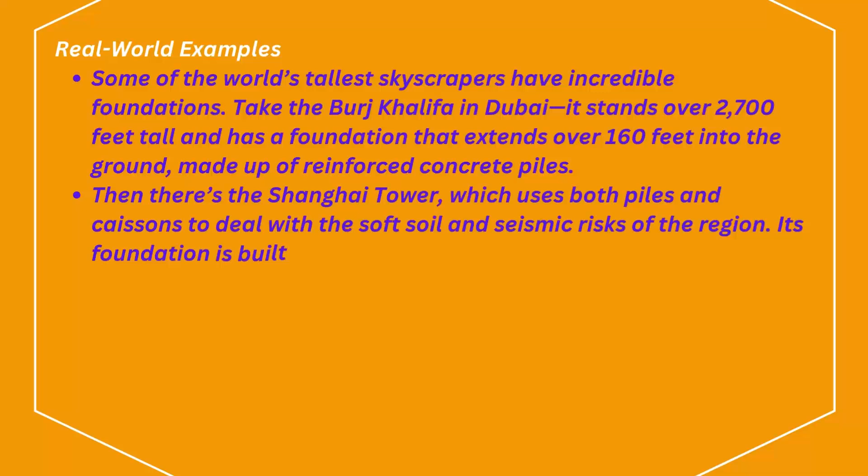Real-world examples. Some of the world's tallest skyscrapers have incredible foundations. Take the Burj Khalifa in Dubai. It stands over 2,700 feet tall and has a foundation that extends over 160 feet into the ground, made up of reinforced concrete piles. Then there's the Shanghai Tower, which uses both piles and caissons to deal with the soft soil and seismic risks of the region. Its foundation is built to withstand high winds and potential earthquakes.

So, how do foundations support skyscrapers? By reaching deep into the earth, anchoring the building to solid ground, and resisting the natural forces that could bring it down. Without these marvels of engineering, the towering skylines of cities around the world wouldn't be possible.